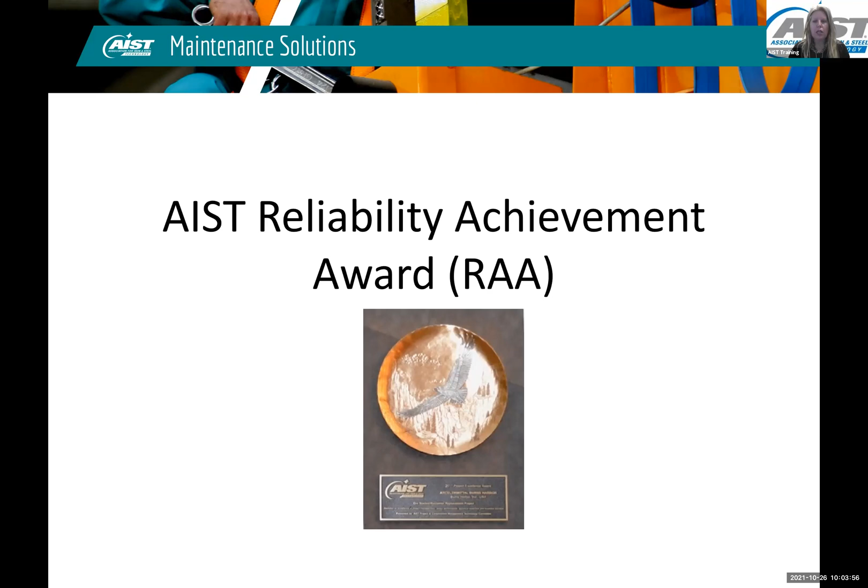Sorry, now my computer's frozen.

It is awarded to an iron and steel producing company that has made a reliability improvement within the organization. It recognizes both the organization and the individual involved in designing, proving, and implementing a policy or practice that increases the reliability of an organization.

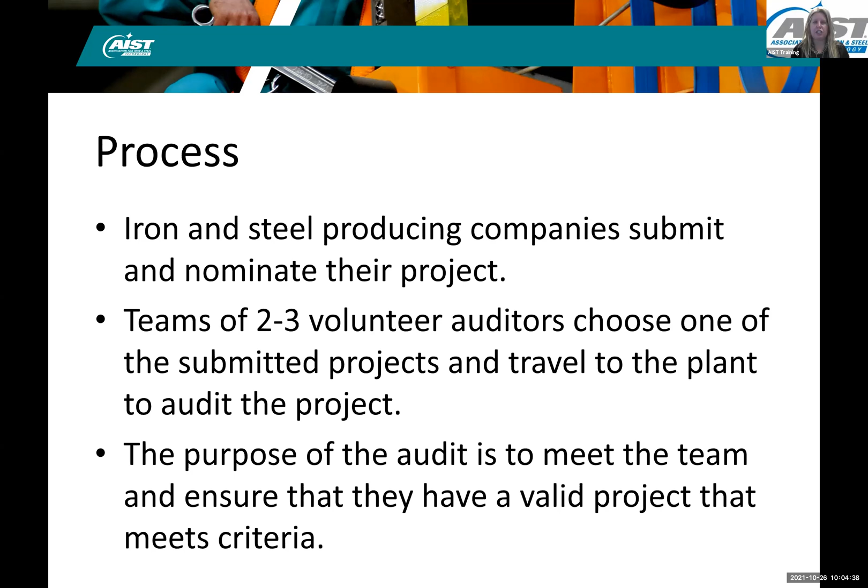We offer 3 levels: gold, silver, and bronze. People nominate and submit their projects, and then a team of 2 to 3 volunteer auditors choose a project. They go to the plant and audit the project, hearing the presentation from the submitter and actually looking at the project. Then the auditors come back and meet collectively, discussing the projects they audited, and using a matrix ranking system based on certain topics, we decide which project was awarded the gold, the silver, and the bronze.

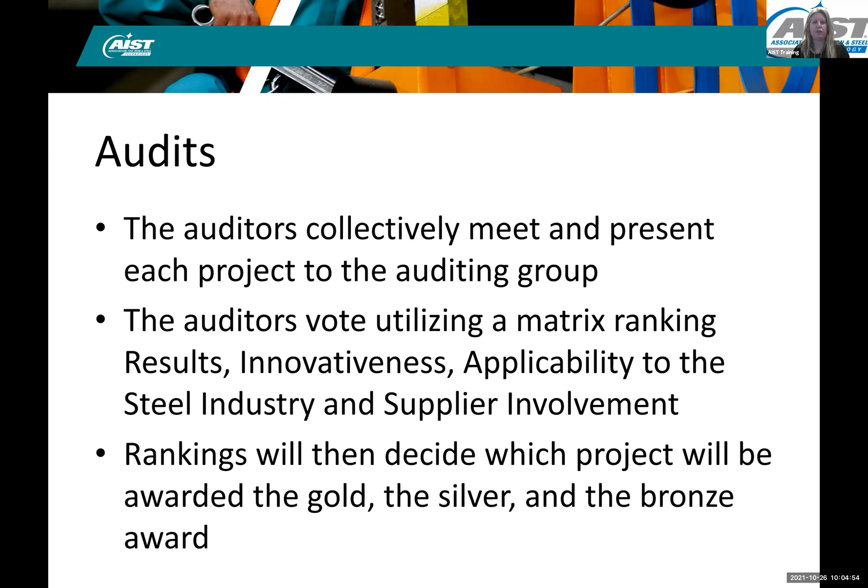So first up, we are going to introduce Jason Vicari. He is the lead maintenance engineer at Cleveland Cliffs, Indiana Harbor in East Chicago. He graduated from Purdue University in West Lafayette, Indiana, with a BS degree in mechanical engineering. He's a certified lubrication specialist through the Society of Tribologists and Lubrication Engineers, and is a registered professional engineer in the state of Indiana. Jason is also the winner of 3 previous AIST Reliability Achievement Awards.

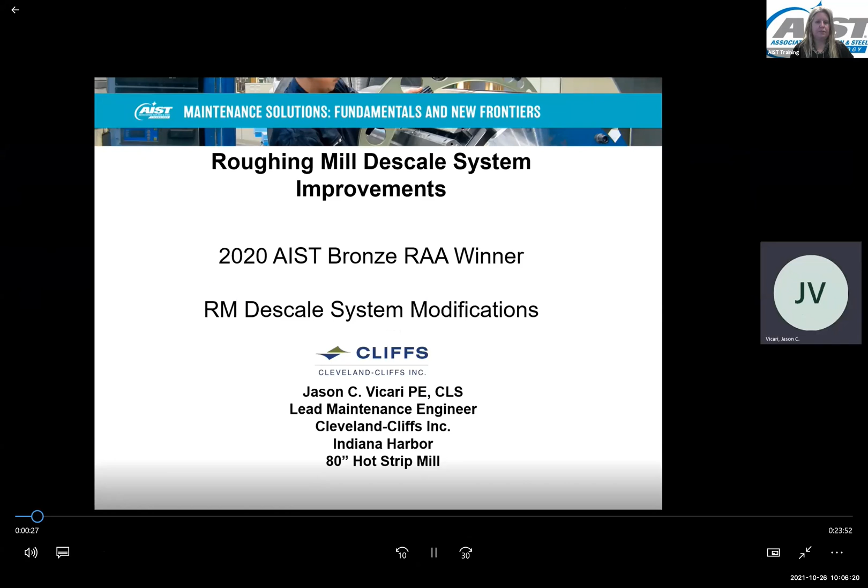Hello, my name is Jason Vicari. I'm lead maintenance engineer at Cleveland Cliffs, Indiana Harbor 80-inch hot strip mill. I'm here today to talk about the 2020 AIST Bronze Reliability Achievement Award winning project, describing our roughing mill descale system modifications.

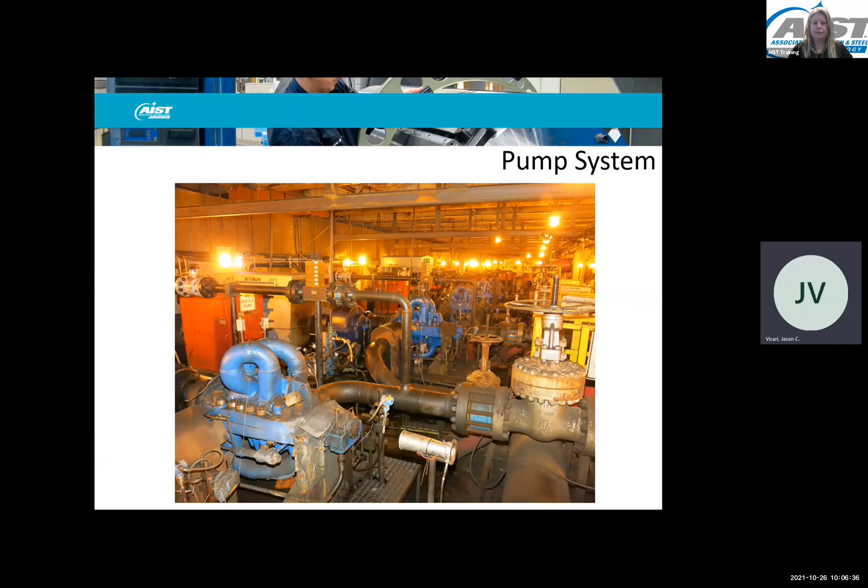We'll start with a picture of our pump room. As background, our roughing mill descale system was original equipment, started up in 1965. I have 5 pumps installed, 4 operated at any given time. The original system operated, depending on which documents you read, somewhere between 1500 and 1650 PSI, and had 13 descale stations. Many modifications have been made to the system over the last 56 years.

One of those was that the pump bypass was changed from an all-or-nothing system to each pump having a separate line back to the inlet of the pump and a shut-off valve installed. Our headers were increased from 4 to 6 inch diameter, but the feed pipes remained at 4 inches. At some point in the past, the nozzle flows were increased, and descale stations have been eliminated over time. We are now down to 6 stations. Each station is top and bottom header.

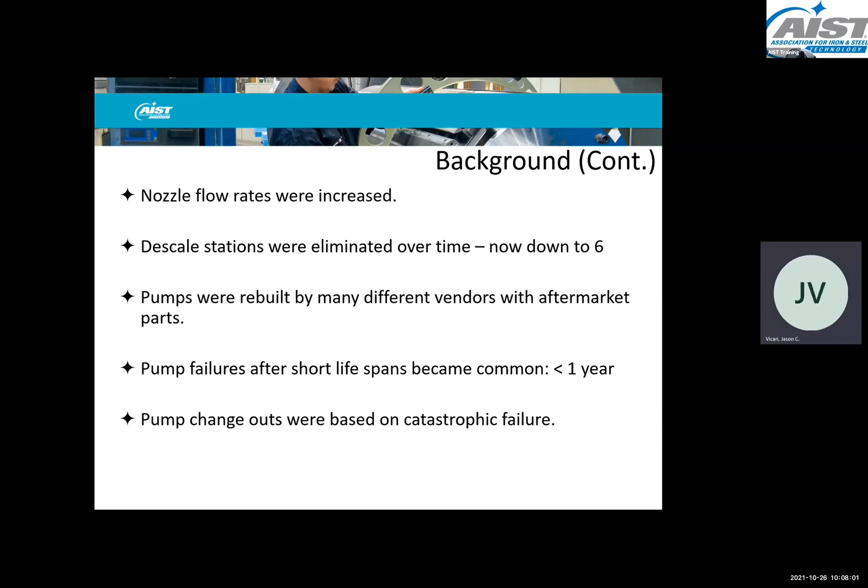Our pumps have been rebuilt by many different vendors with aftermarket parts over the years. When I first started looking into this system, pump failures occurred after short lifespans, and service time less than 1 year became common. Pump changeouts were based on catastrophic failure, not on any kind of preventive method. We had pipe washout in certain parts of the system. Our bypass valves would wash out. Our gearboxes, speed increasers, would experience wiped Babbitt bearings and broken gear teeth.

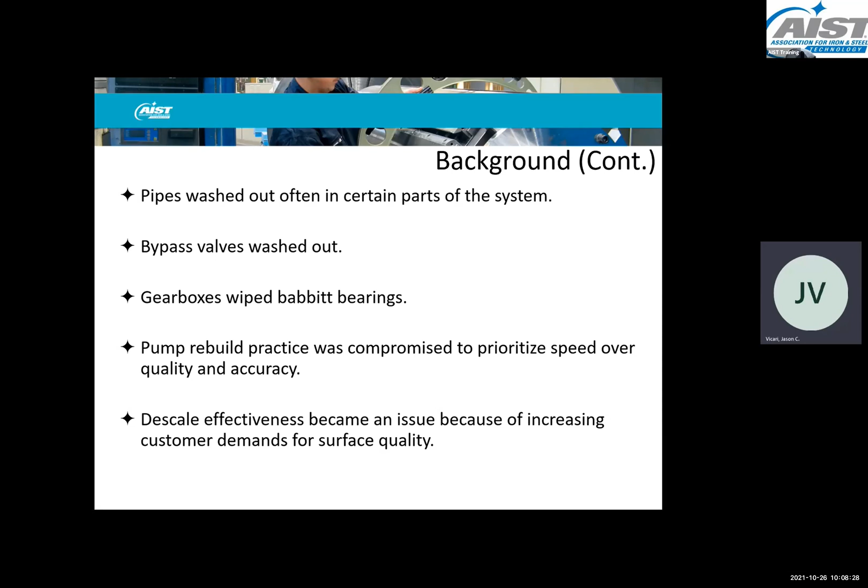Our pump rebuild practice was compromised to prioritize speed over quality and accuracy. And eventually our descale effectiveness became an issue because of increasing demands from our customers for better surface quality.

A major change that happened to this system was that we installed a second descale system that supplied the Pentrol scale breaker, which is a bank of 2 banks of headers right before the finishing mill. That brought us down to 6 stations for the roughing mill. The commissioning of the pinch roll scale breaker system in 2005 and the startup issues with that system led to a major project.

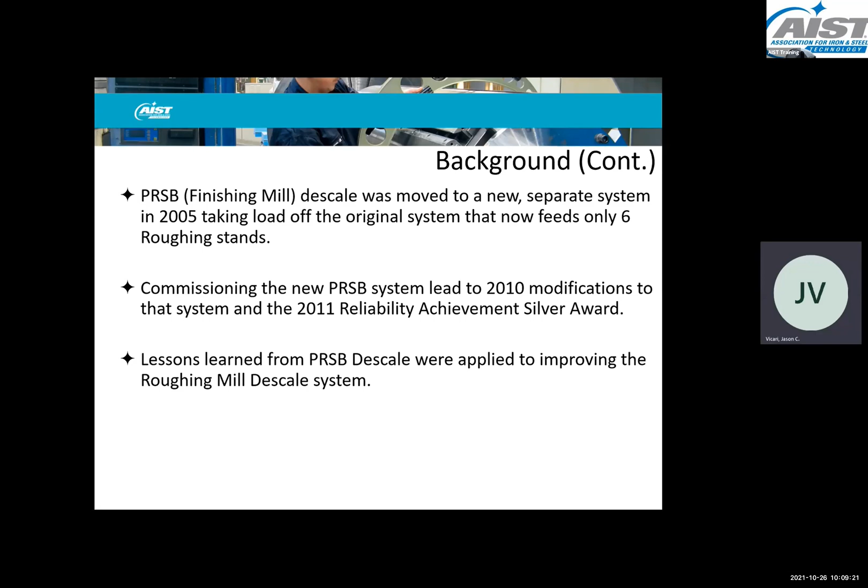That project, which I did in 2010, improved reliability of that system and earned the 2011 Reliability Achievement Silver Award. Lessons learned from the pinch roll scale breaker system were applied to improving the roughing mill descale system, which is the subject of this presentation.

So this project is really a long list of consistent and persistent work. This presentation is put together in chronological order to describe that work, which really started in 2008 and continues until today. It's important to note that the Reliability Achievement Award process from AIST recognizes that vendors and suppliers are very important partners in improving reliability and sustainability.

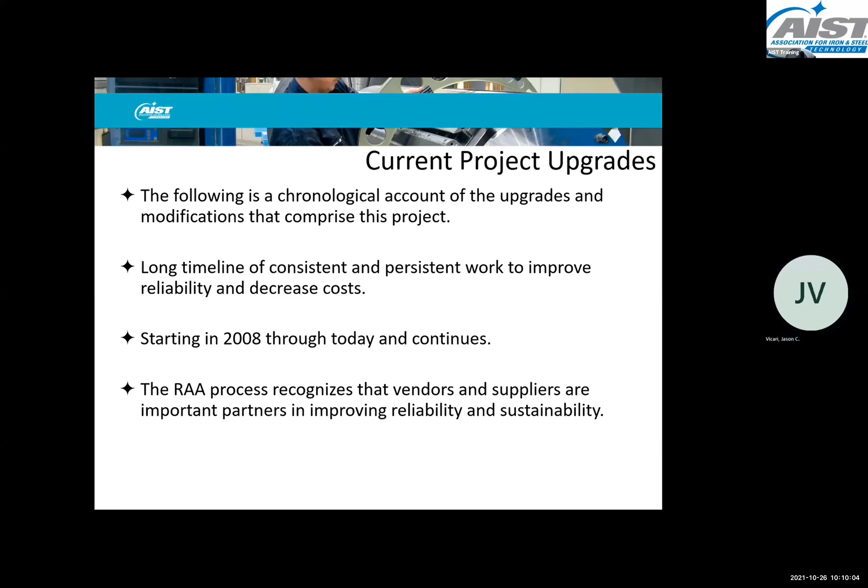So in 2008, we added instrumentation to discover that our incoming filter, which hadn't really operated for a long time, was partially plugged and restricting water at a large pressure drop to the inlet of the pumps. So we replaced it with a Ball & Kirk self-cleaning filter with 500 micron filtration. And our bypass line around the filter had been too small, so we increased it to the proper size to supply our pumps.

During the same period, we also inspected and recertified our 2,000-gallon air over water accumulator to provide some instantaneous flow and some shock absorption. BOC Water Hydraulics helped us with the automatic shutoff valve and instrumentation so we could monitor the level and pressure in our bottle. There's a picture of our self-cleaning filter with our now properly sized piping.

2009, we upgraded our descale nozzles from, by all accounts, ones that had either been in service and unchanged for 30 to potentially 50 years, and upgraded those nozzles to state of the art.

Choosing a new supplier for nozzles was pretty easy. Our plant manager had experience at a previous steel mill with Everloy brand descale nozzles. Those are produced in Japan. Just as a note, Lechler is a German company that makes descale nozzles and Spraying Systems makes nozzles that are made here in the United States. Both of those companies are very capable and have products that can perform similar descale work. In my particular case, I didn't get a chance to evaluate them because of the directive from the plant manager.

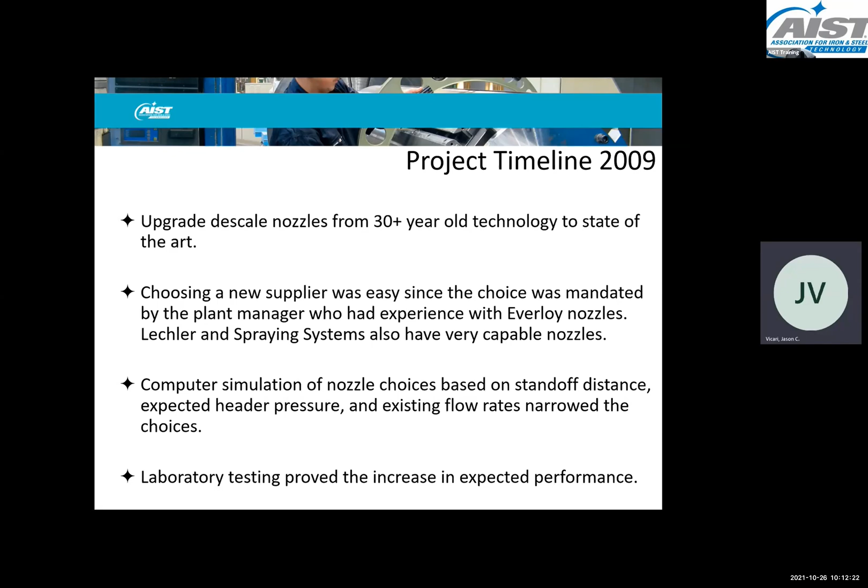But Everloy also provided laboratory testing and simulations based on our standoff distance, header pressure, and existing flow rates to narrow the field. And those simulations were backed up by the laboratory testing to prove that performance would be as expected.

So the nozzle selection in 2009 was based on the 7-inch standoff that we have at our horizontal scale breaker, which is our first roughing mill at 7 inches, and then the R1 through R5 stands, it's actually 9 7/8 inches. That's a typo, it's correct in the table. The impact improved at the larger standoff distance. It was about the same at the 7-inch closer standoff distance, but the quantity that drastically improved was the erosion, which is really a measure of how effective the descale is.

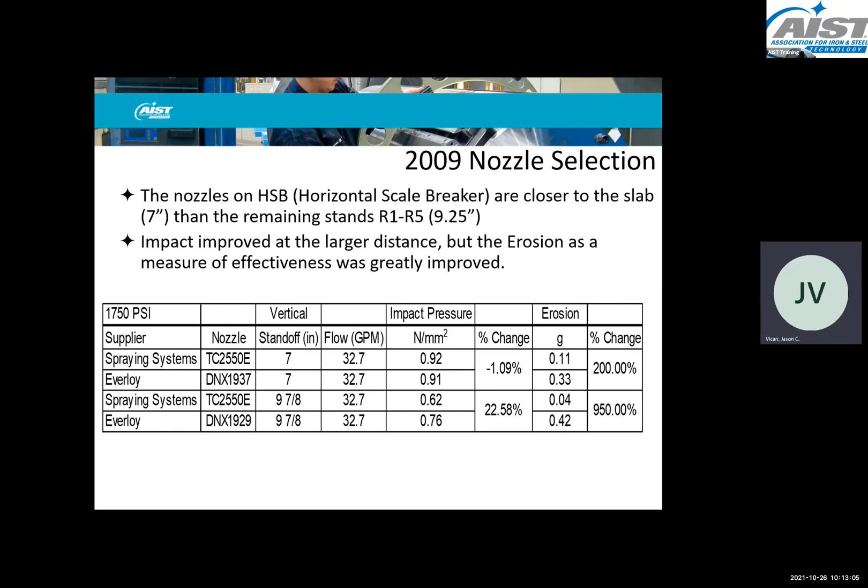The nozzles are tested by Everloy and the other nozzle manufacturers using a pressure transmitter that sweeps across the spray to give a profile, which is the top picture there, and the bottom picture is an indication of the maximum impact pressure experienced throughout the spray.

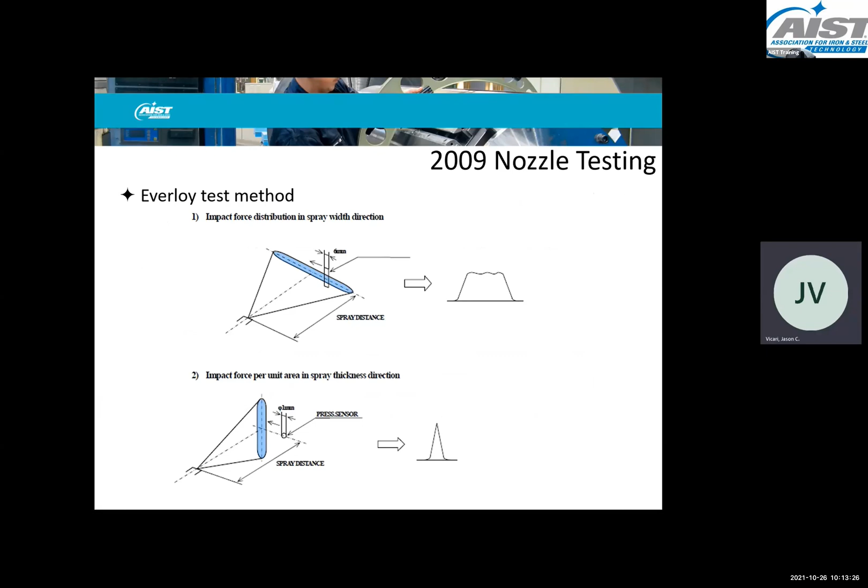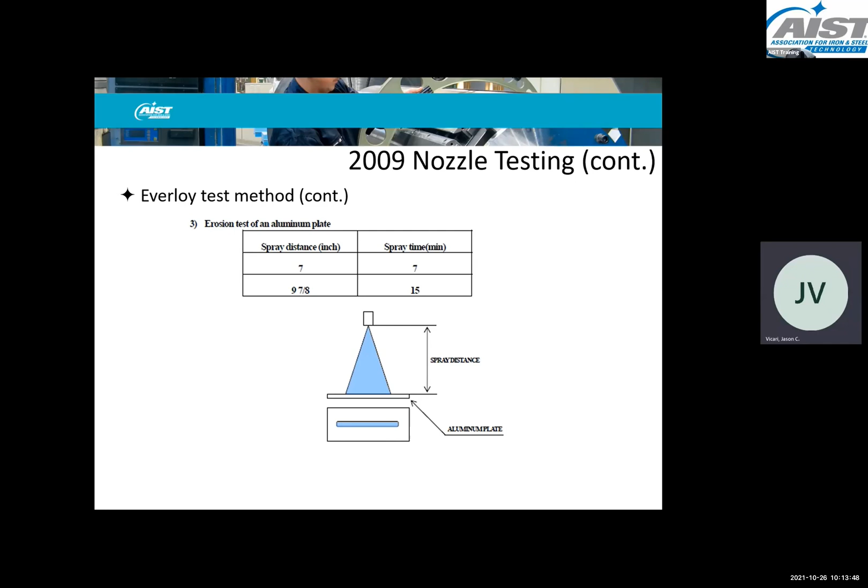And moving along then in 2010, we restored our system relief valve, installed a fixed orifice to control the amount of flow. BOC water hydraulics helped us with that unit.

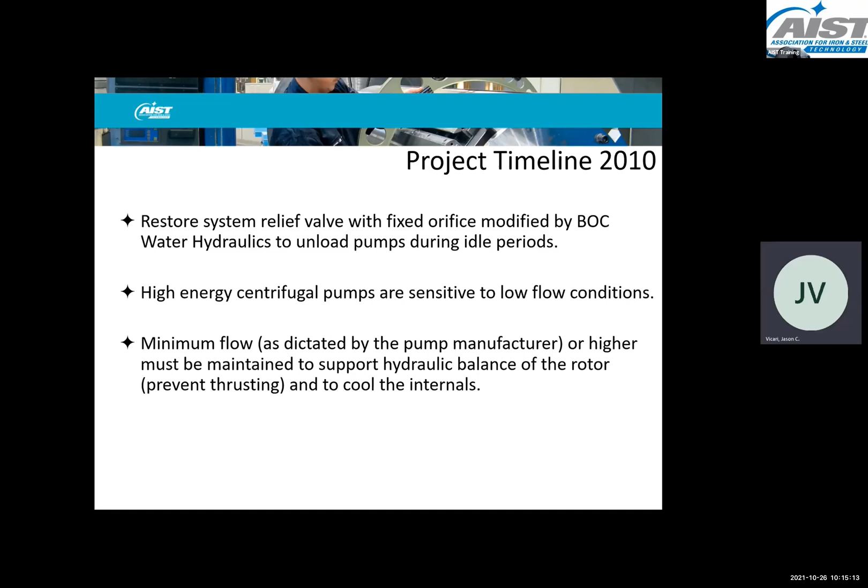As a side note, high energy centrifugal pumps, such as my 4-stage Worthington, are very sensitive to low flow conditions and to large changes in flow conditions. A minimum flow requirement is usually specified by the pump manufacturer. That minimum flow or higher must be maintained to support hydraulic balance of the rotor and to prevent thrusting, and to make sure that the internals of the pump stay cool.

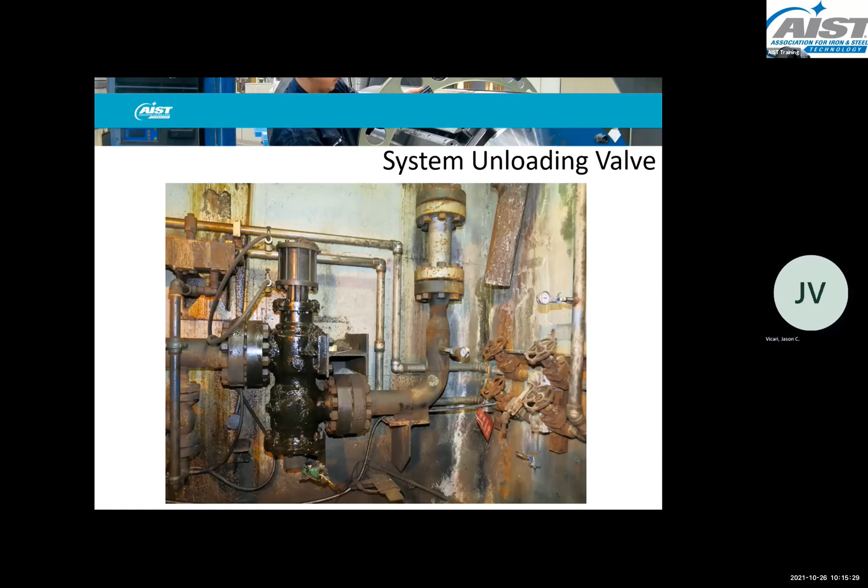Here's a picture of our unloading valve going through our fixed orifice, the dumbbell unit that's in the vertical piping there. And that dumps into the flume just to give the pumps some additional flow to keep them running smooth and cool during idle times on the mill.

In the 2011-2013 timeframe, we reconfigured the pump bypass to eliminate the shutoff valve. What we had found was that the weaker pumps that were being shut off, had their bypass shut off, were essentially deadheaded since they weren't able to flow through the bypass and they weren't able to overcome the discharge check valve. So this would lead to rotor thrusting and premature failure of pump gearbox system.

We restored the discharge piping of the pump to the proper 10-inch check valve and piping from the 6-inch that had been installed at the time due to previous failed equipment and budget reasons. The piping couldn't be restored to where it should have been at the time. We also installed a fixed orifice unit from BOC Water Hydraulics in the bypass line to regulate that bypass flow.

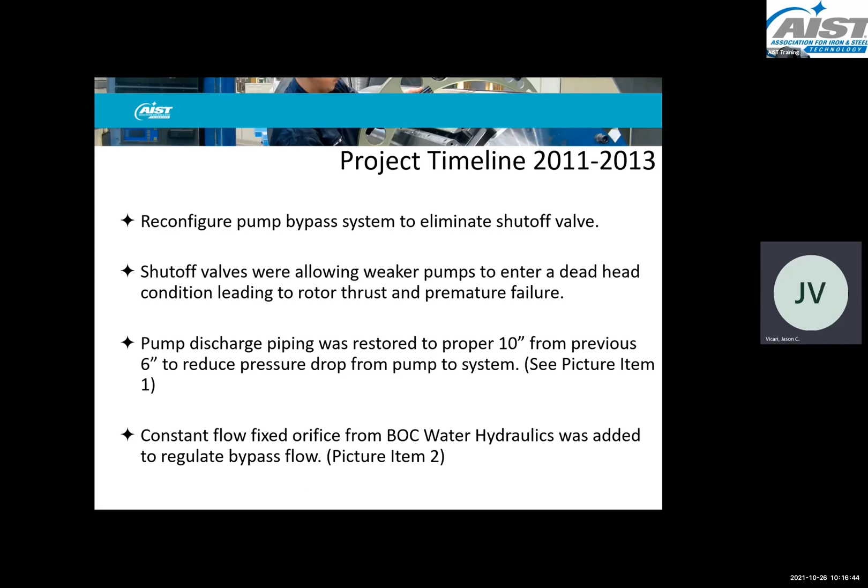So I have a picture here in one more slide. The flow through the bypass needs to be monitored to show the health of the pump and the condition of the fixed orifice plates. At the time, we didn't have the budget to install a flow meter, but one was specified, and a spool piece was installed in our piping so that later on when we had the funding, we could install flow meters. Those flow meters were installed in 2017.

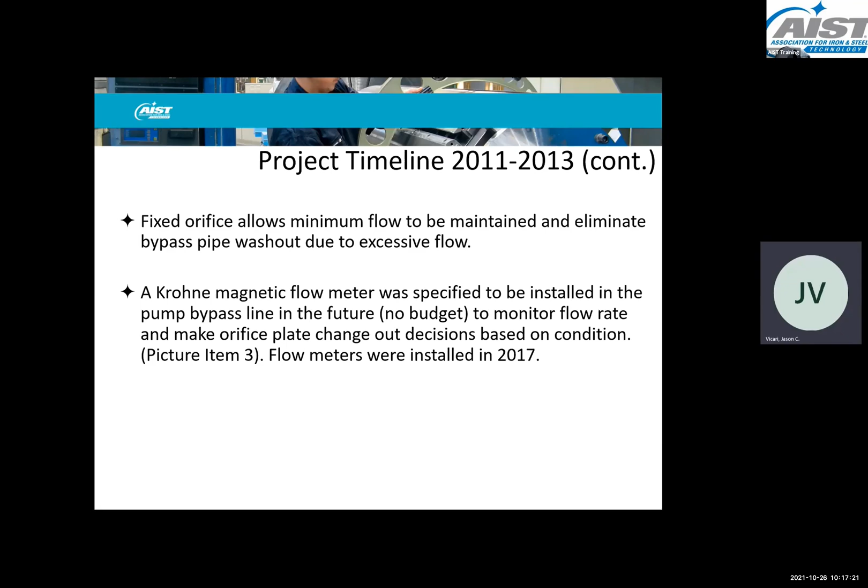So there's a picture of our pump setup with our discharge and bypass. Number one is the discharge line, which was increased from 6 to 10, with a new style check valve installed. Number two is the fixed orifice unit, which regulates the bypass flow. There's always bypass water flowing off the pump so that when system conditions change, the pump always has somewhere to send the water. Number three is the mag flow meter that helps monitor that process.

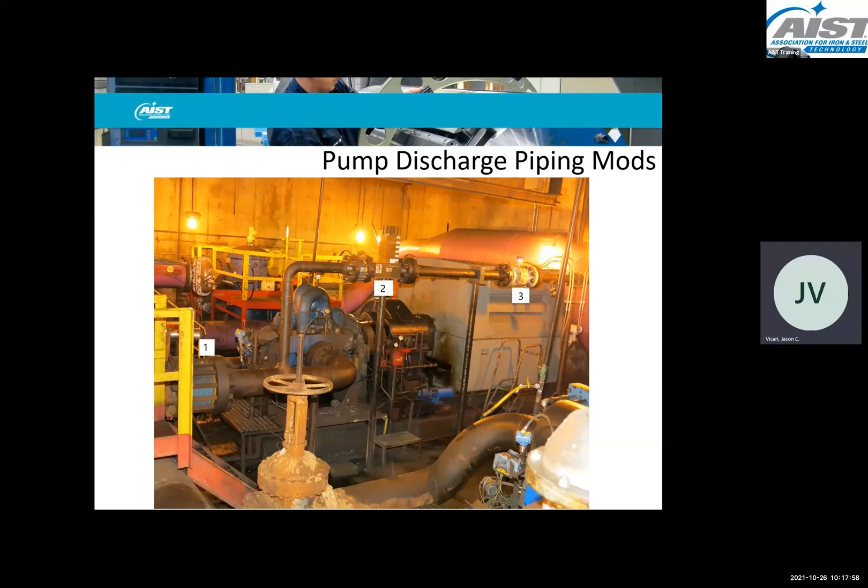In 2016, we improved the header prefill system. We always keep water flowing through our headers so they're always charged, so when you open the main valve, you don't have water hammer that could damage the nozzles or the header. The previous units had a large amount of turbulence and regular pipe washout. The BOC stacked orifice design eliminates that turbulence. Since we installed those units in 2016, we have not had any washout in that area. Based on prior experience, we've learned we need to change those plates out about every 30 months, which is pretty low maintenance.

Here's a picture of one of our descale valves in the center, and up at the top right you see the double flanged stacked plate orifice system. When the plates wear out, we just change the plates. The body is a forged stainless steel body, which has a very long lifespan.

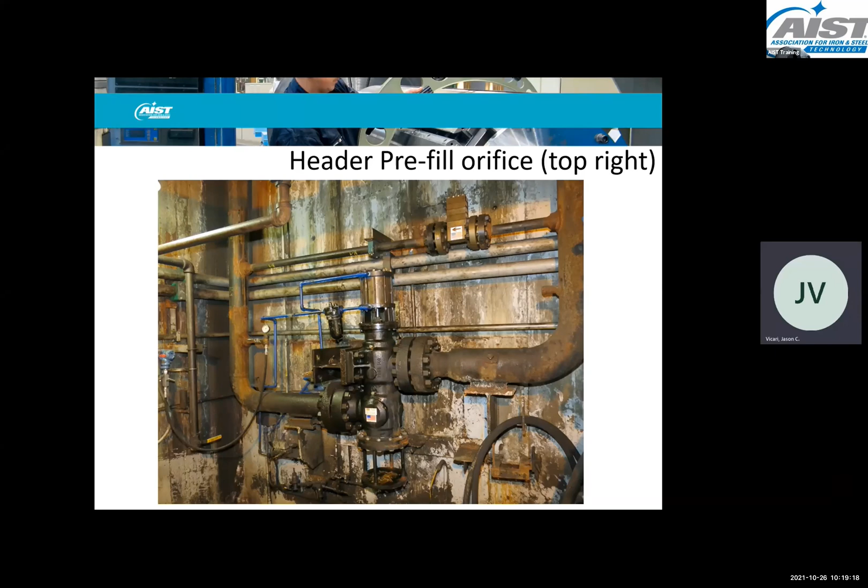In 2017, we saw that our pump life had been improved greatly with the system modifications made up to that date, but our performance still lagged our expectations. At this time, we had a pump that was lagging repeatedly after rebuild by 2 different vendors, 4 different times. So we took the pump for a full inspection and engineering analysis to HydroAire in Chicago.

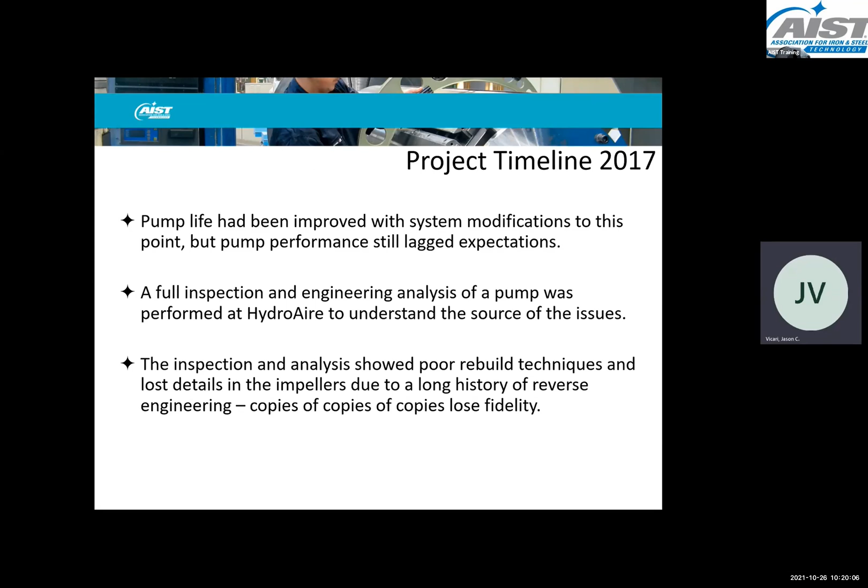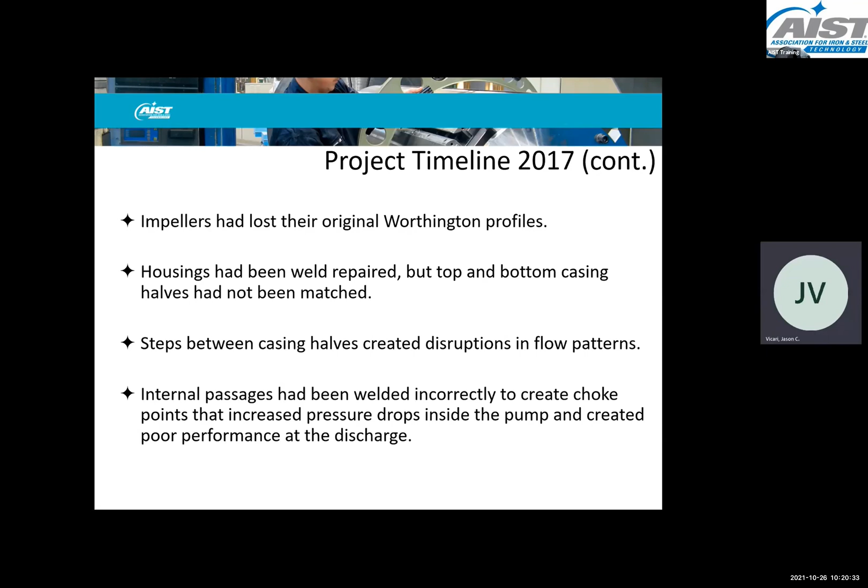Their inspection and analysis showed poor rebuild techniques and lost details, especially in the impellers, due to a long history of reverse engineering—copies of copies lose fidelity and performance. The impellers had lost their original profiles. The housings had been weld repaired, but the top and bottom casings were not matched to each other. This created steps between the two halves that resulted in disruptions in flow patterns and pressure drops. The internal passages had been welded incorrectly, creating choke points, which also caused poor performance.

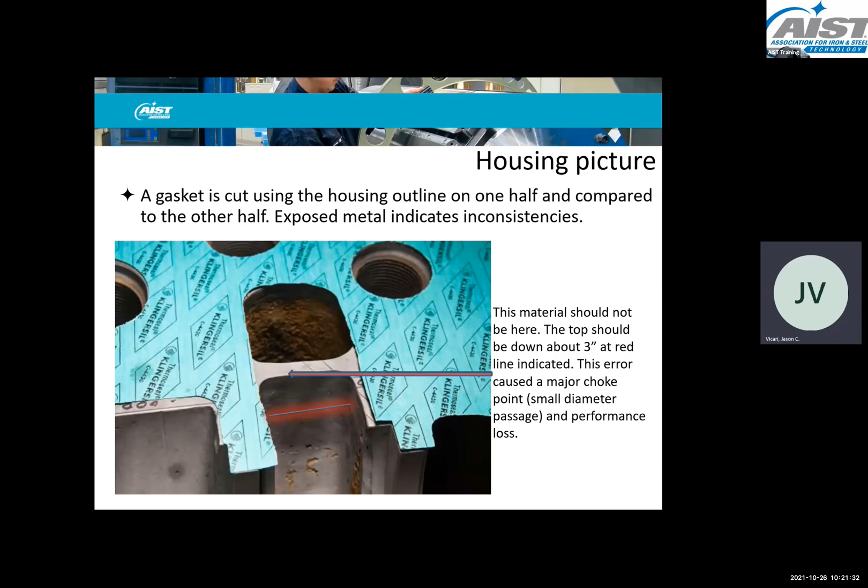The Hydroware engineers and repair specialists were able to correct the housing issues. They used computer models and computational fluid dynamics to redesign our impellers, manufacturing new impellers with proper profiles and oversized diameters. They assembled the pump with the oversized impellers, tested it, got results, disassembled, trimmed the impellers to match the performance we were looking for, reassembled the pump, and put it back on the test stand to prove the performance—and it was as we expected.

Each of our 6 pumps was rebuilt this way to return to original performance, and each pump was fine-tuned based on testing since each housing was worn differently. Our average pump life to this point has improved from some cases less than a year to as long as over 4 years now. Each pump disassembly includes an analysis of the failures, and we discuss improvement ideas—we practice continuous improvement. The goal is 20,000 hours of operation and 5 years of service, and we're getting there one step at a time.

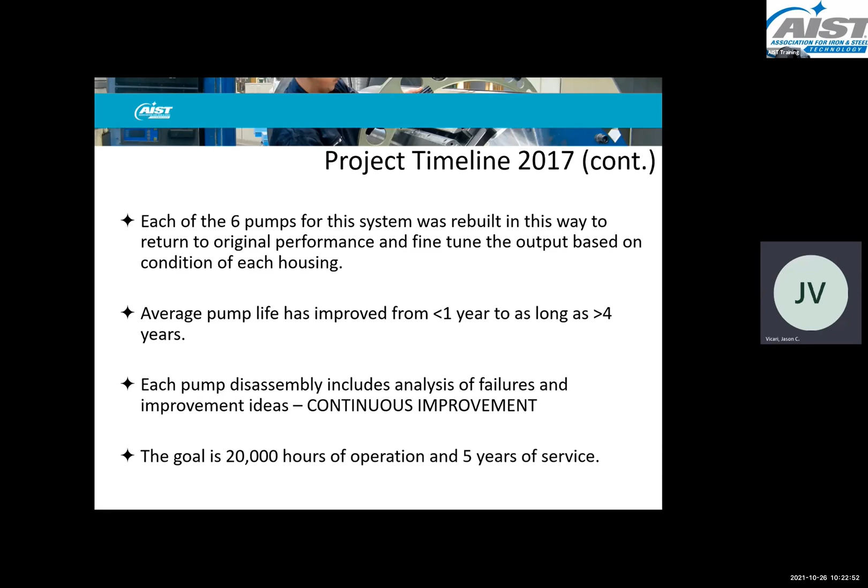In 2017, once our pump restoration was completed, it was obvious there were additional opportunities to improve efficiency. Everloy had introduced a new generation of nozzles in 2011.

Because of other activities I'm involved with in the mill, I didn't have time or really need to evaluate those, but now was a good time to look at that technology.

We found that the new nozzles could increase impact and erosion at the same operating pressure and flow. So with the increased performance of the rebuilt pumps, it was possible to decrease nozzle flow to the point where we could shut off the fourth pump and just run 3.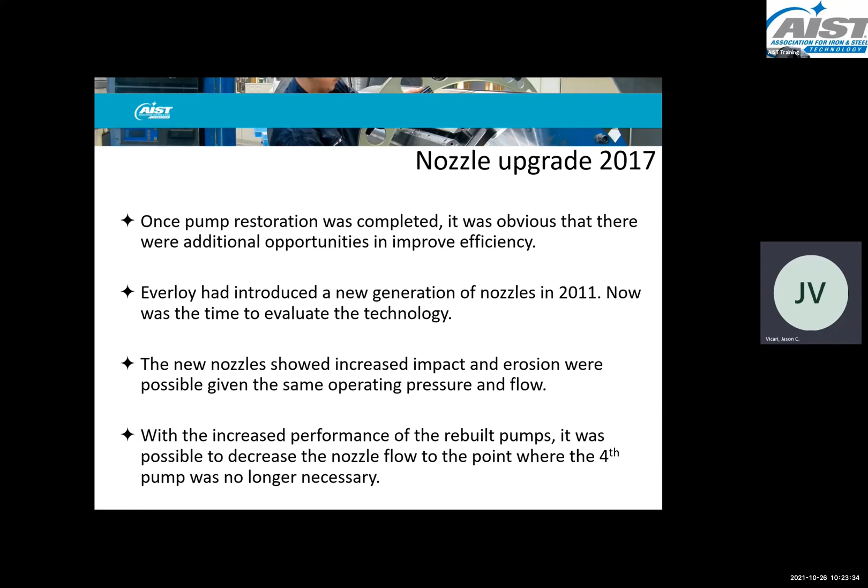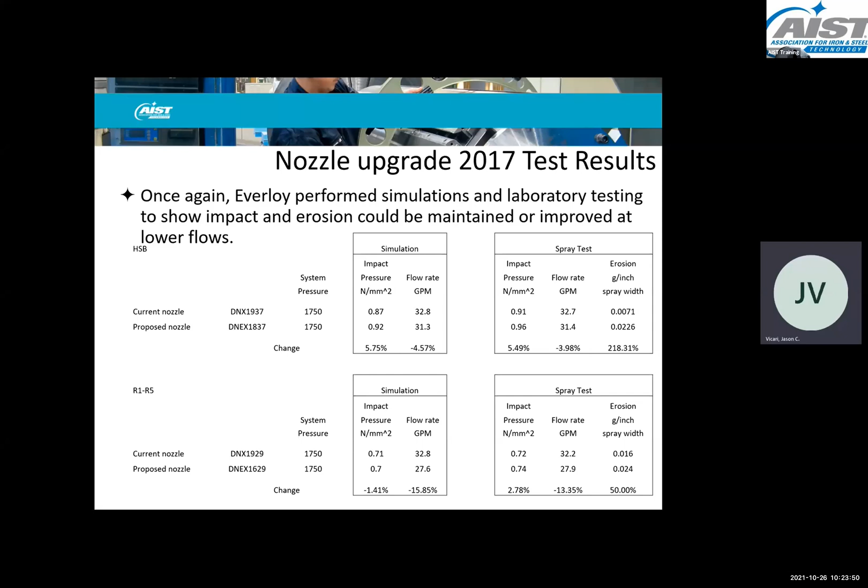This table is a little busy, kind of small, but we went through the same simulations and laboratory testing to show impact and erosion could at least be maintained, and in some cases improved, at lower flow rates.

The result of all that was that we decreased the flow rate at HSB, our first descale station, by 4.5%. We kept that flow a little higher because it's our primary descaler and we wanted the flow to sweep away the heavier scale coming out of the furnace. Flow rate was decreased at R1 to R5 by almost 15%.

Another benefit was the decreased flow rates. Remember, the flow rates had been increased in the past, but now with decreased flow rates, we had an improvement in the pressure drop from our main header to our nozzles by roughly 33%. So we decreased our pressure drop by 33%, which increases the energy imparted at the nozzle to the surface of the slab.

Also, our header pressure increased due to the reduction in flow. Our operating pressure increased from about 1750 PSI in 2009 to now routinely over 1850 PSI, which also increases the effectiveness of the nozzles again.

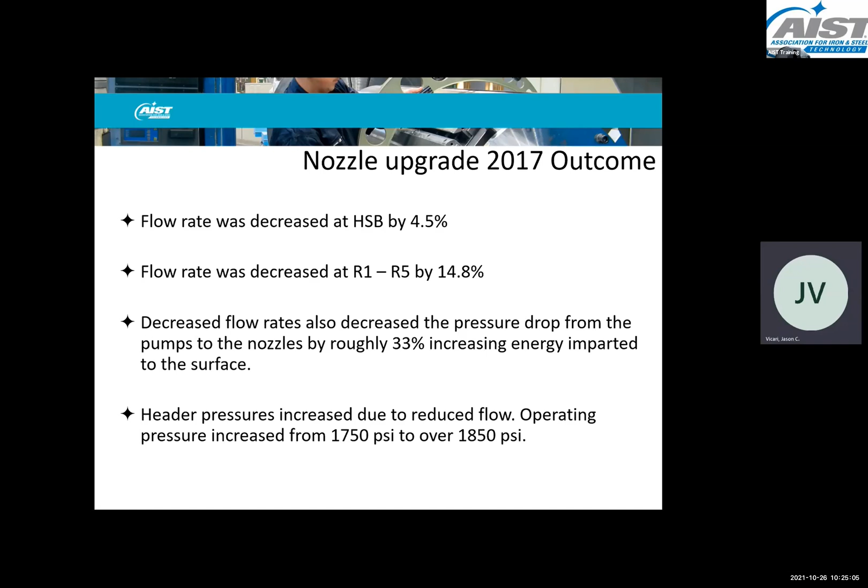So I'd like to go through a little bit of nozzle theory, just to prove that pumps are important to a system, but they're not the only part of the system.

I'm sure many of you have used a pressure washer, and you know the closer you get to the surface you're cleaning, the more effective the cleaning is. Well, this is no different, just on a much larger scale.

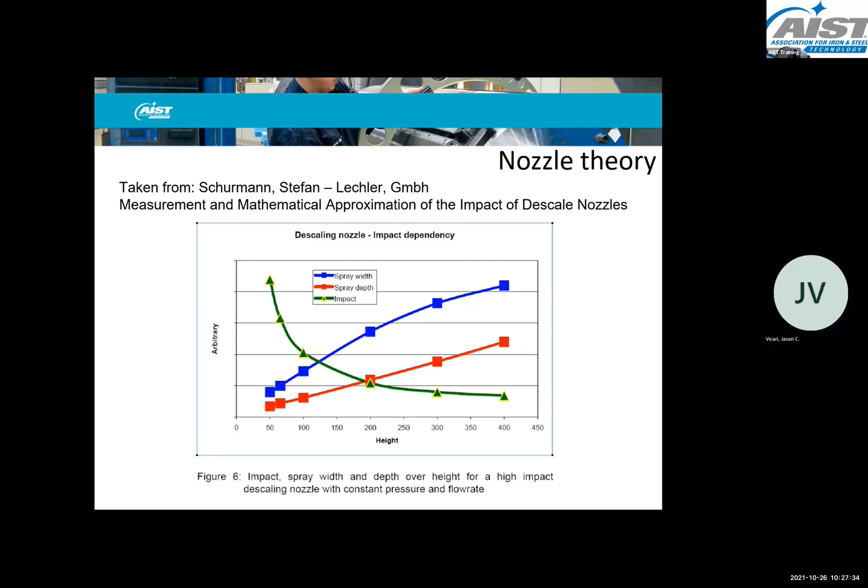So the benefits: by eliminating a pump and running 3 pumps instead of 4, our energy consumption reduced by 1,800 horsepower, which equates to roughly 9,800 megawatt hours per year, and roughly $680,000 per year in electricity.

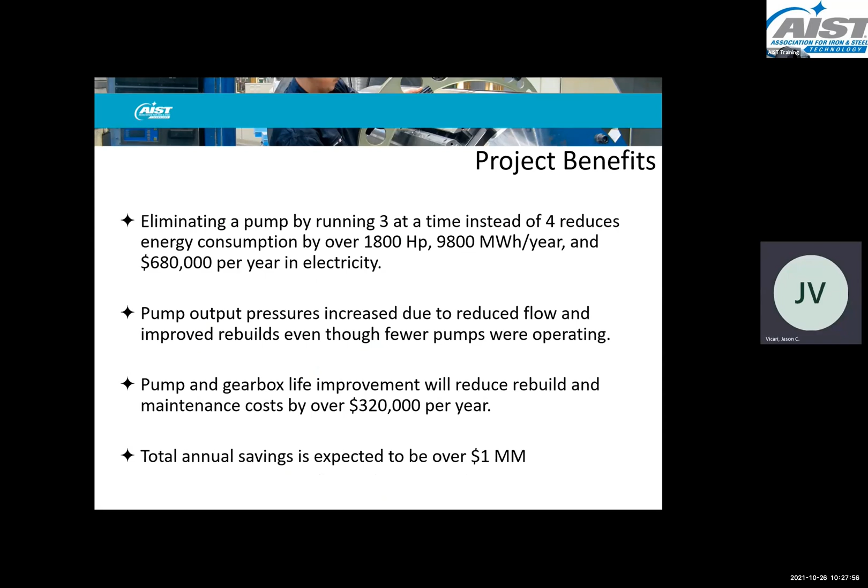Our pump output pressure increased due to reduced flow and our improved rebuilds. Even though we're operating fewer pumps, we have better performance. Our pump and gearbox life improvement will reduce rebuild and maintenance costs by over $320,000 per year. We haven't had any gearbox issues since we started this process 4 or 5 years ago.

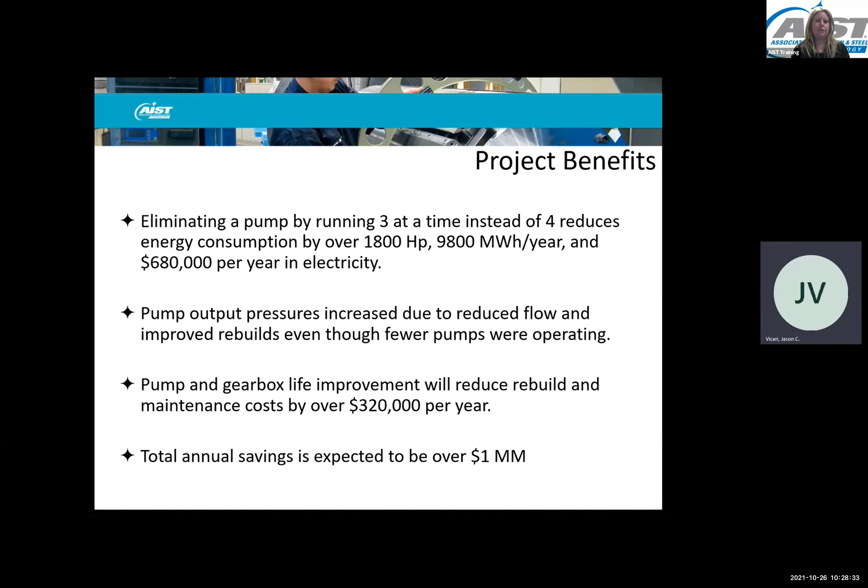Those same gearboxes are still in service. Plus, running fewer pumps leaves us now 2 online spares instead of 1, which spreads out our rebuild costs. Our total annual savings are expected to be over $1 million a year.

Major takeaways I'd like to leave you with today is that the pump is part of the overall system, but the system dictates how well the pump will run or if it will fail. I like to say the descale magic happens at the nozzles. The nozzles set the flow rates, which really dictates where your pump is going to operate. So the descale nozzles have to do the job of cleaning the strip, and you have to choose nozzles based on where your pumps want to operate most efficiently.

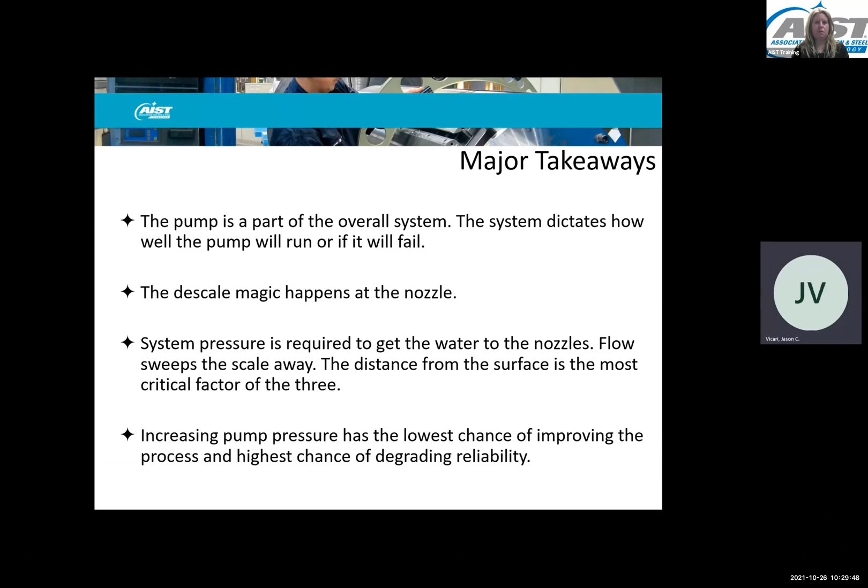System pressure is important to get the water to the nozzle, but the flow sweeps the scale away, and the distance from the surface is really the most critical of the 3 factors. Increasing pump pressure has the lowest chance of improving the process and highest chance of degrading reliability. Many of the issues we found in our primary scale breaker turned out to be pressure fatigue failures. The pressure was too high for the piping network as it was installed and led to rapid fatigue and failure. So higher pressure is not always a good thing. Increasing the effectiveness is really something that should be investigated.

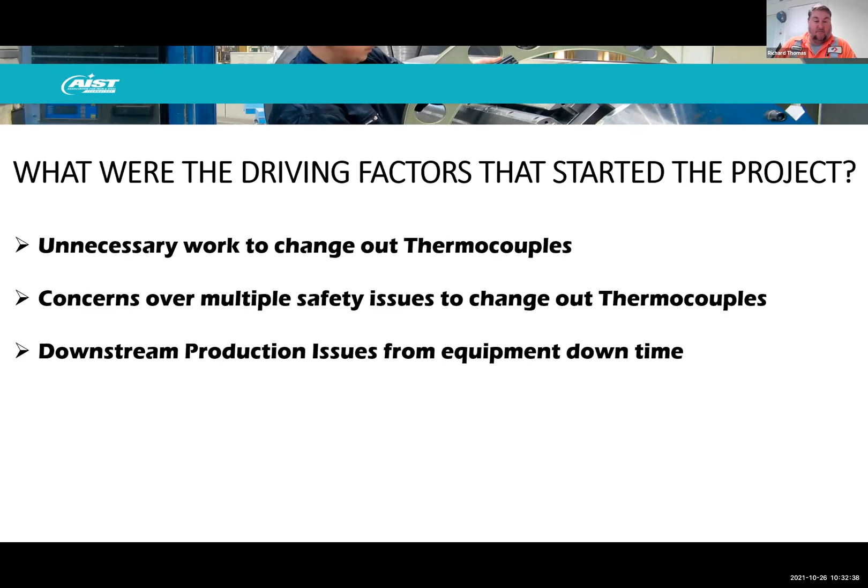Plus then we had ladle walls down, so we would impact production issues with the downed equipment. We were taking a long time to change out a thermocouple because we were constantly running in and out with the ladles on adjacent walls, moving in and out with the process. So I figured there had to be a better way to do it.

In 2017, I went to an automation fair in Atlanta, saw these optical pyrometers sitting on a table, asked them if it would do what I wanted, and of course they said it will, like any good salesman would do. Brought it back to my boss, who told me, yeah, if I think I can make it work, then go for it. So that's how it all started.

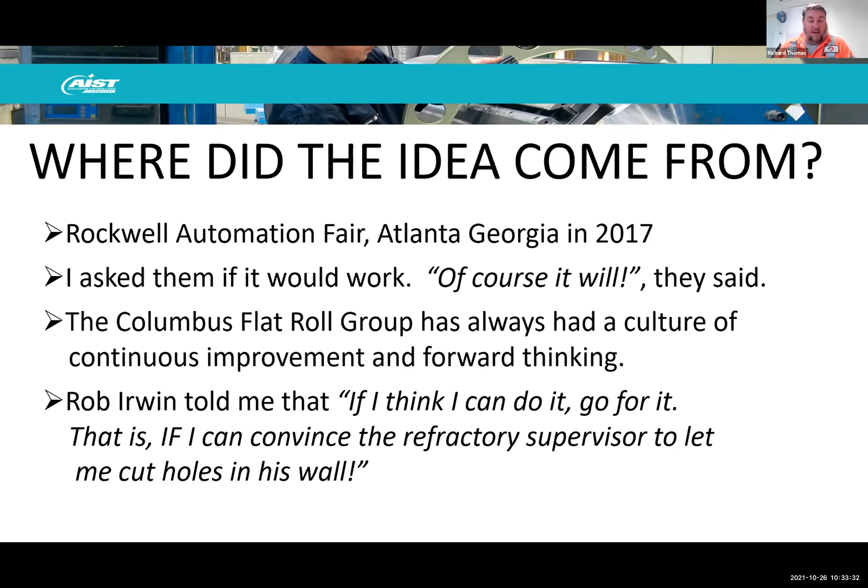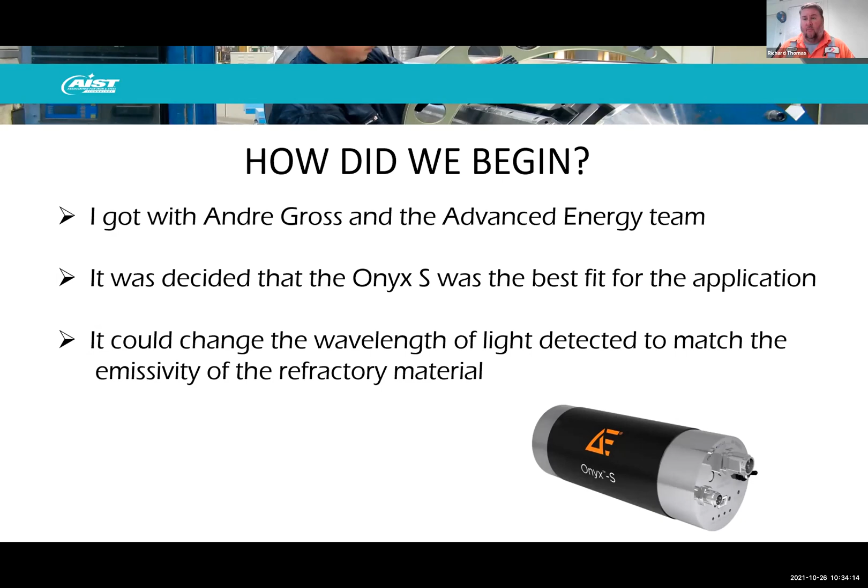So I got with Andre Gross and the Advanced Energy team, and we picked out the Onyx S pyrometer. The reason we went with this particular pyrometer after looking at several different types is that we could actually change the setup in the pyrometer and adapt the settings to the exact emissivity of the refractory material. The emissivity is the ability of any object to give off light when it's heated. So by being able to tune that, we were able to get a very accurate reading.

One of the major additions to the project was designing the sight tube for the pyrometer to look through, because the pyrometer is actually looking at the glow coming off the brick, so it has to be able to see through the wall. The hardest thing I had in the whole project was convincing the refractory supervisor to let me cut a 3-inch hole in his ladle wall.

So we made the tubes out of a solid stainless round stock, had them turned down in a single piece, 3-inch diameter with a 1.5-inch ID and a 5-inch flange on the outside. The tube was then welded into the ladle wall, and the pyrometer was connected via a bolt pattern, a 4-bolt pattern that you see right here.

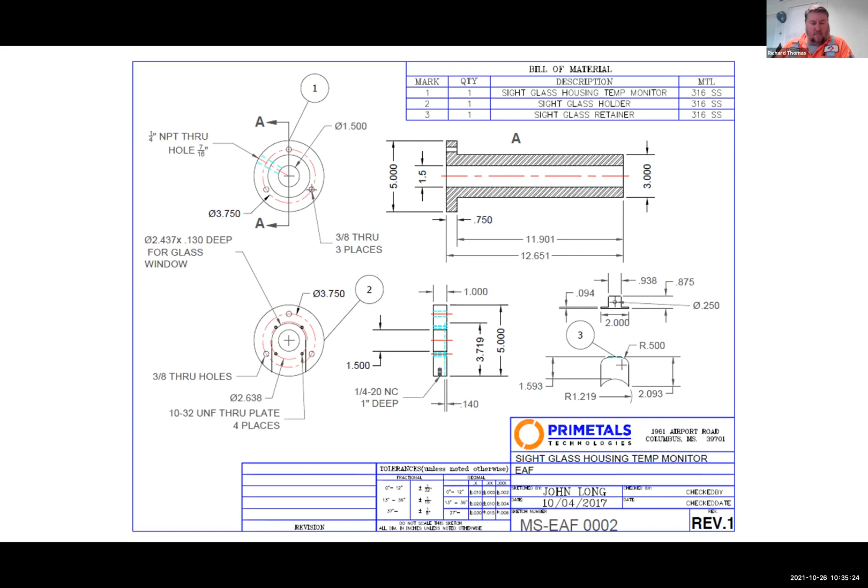We machined it out of 316 round stock with a 3/4-inch sidewall, so it didn't warp in the 1800-degree continuous heat. We also designed it so the end of the tube did not stick out of the refractory. One of the things that took the thermocouples out all the time is they had to stick out into the ladle area, so when a crane would pick up a ladle, it would often hit the thermocouples and bend them. By keeping the sight tube inside the refractory, we got rid of that problem.

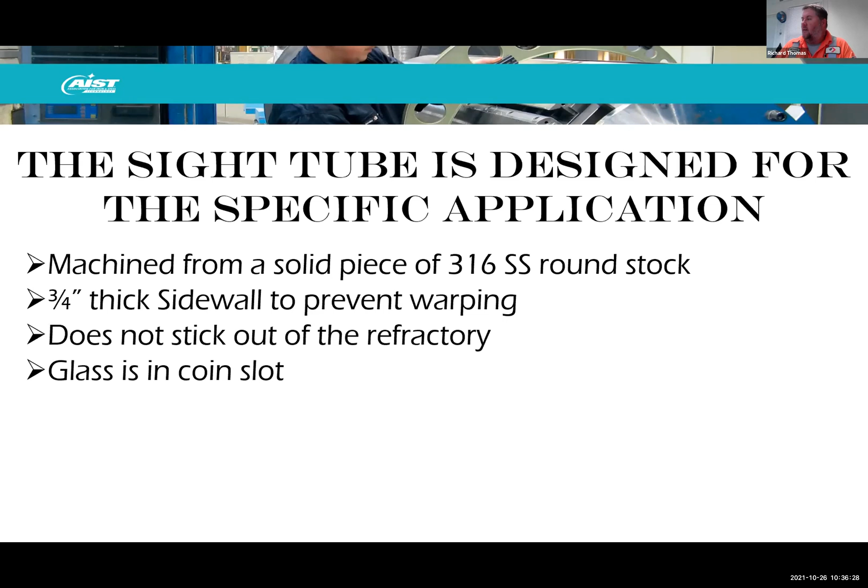The first time we put the pyrometers in, we were just observing. We had the thermocouple still controlling as it always had, and we were monitoring the pyrometer, which was set pointing at the bottom of the ladle. I was reading 1800 degrees on the thermocouple, our standard set point. The pyrometer was reading 2100 degrees, which we assumed was just because the bottom of the ladle was always a little hotter, wasn't a problem. We watched that for several days and it stayed consistent.

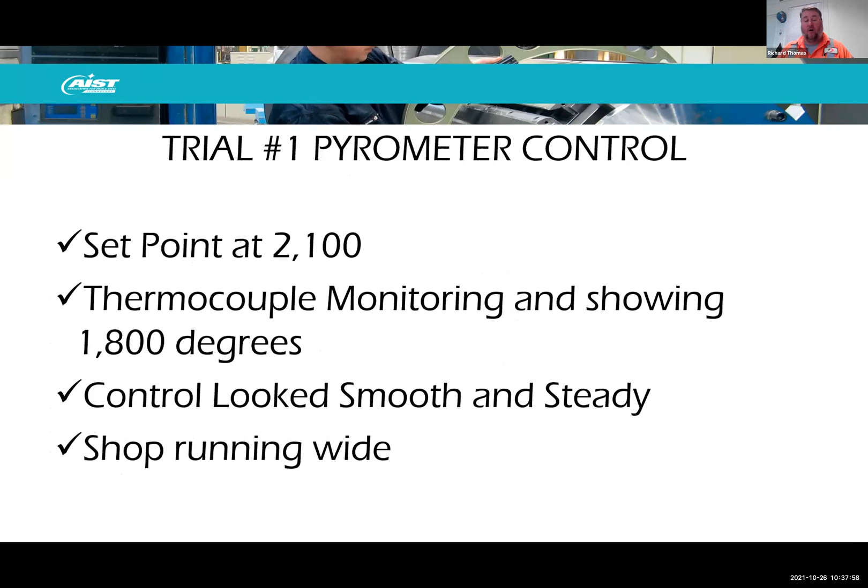Once we got satisfied that the pyrometer was working properly, we decided to attempt control with it. Since I was always seeing consistently 2100 degrees at the bottom, that's where we put our new set point on the burner controller. The thermocouple was still in, and now we were monitoring it, showing 1800 degrees like it always did. Everything looked good, looked like we had a good application going. The shop was running wide at the time, meaning we were cycling ladles through the ladle wall every half hour or so, or less.

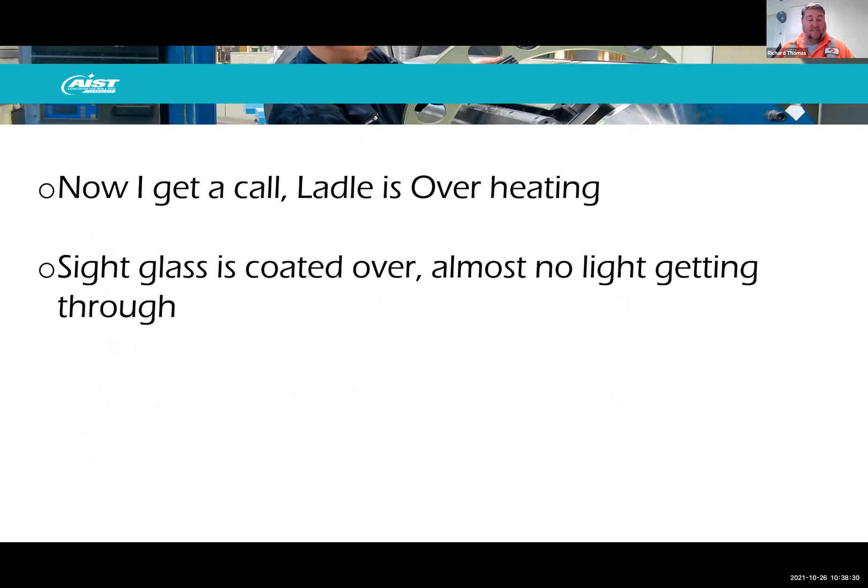Then one morning I got a call saying the ladle was overheating. I went down there, took a look, and the sight glass had coated over with slag, with almost no light getting through. The pyrometer sees the light, and if it can't see the light, it's not going to get a good reading. So the burner was maxed out all the way open because it was trying to reach that set point, so we were overheating the ladles. We changed out the glass and everything went back to normal. It was all good.

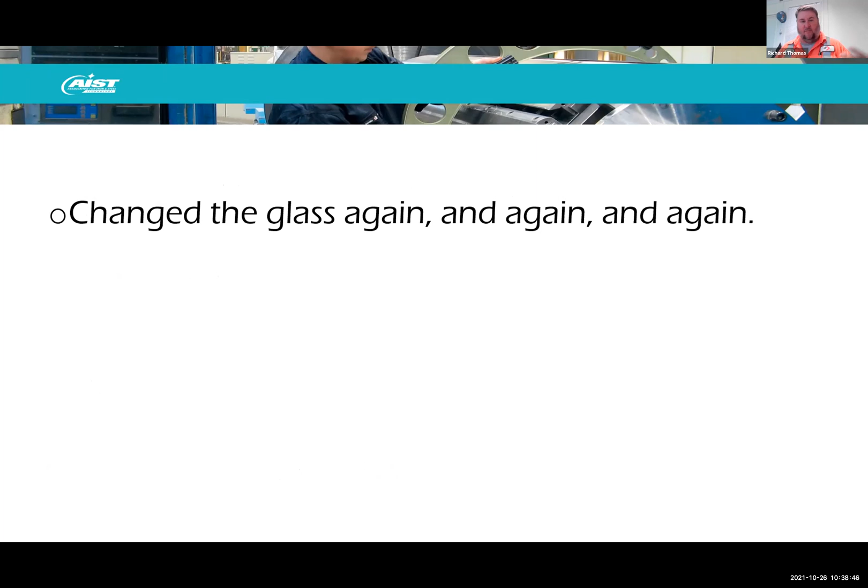The problem was, this kept happening. We changed the glass over and over and over again. Now, instead of being down there changing thermocouples, we were down there every day changing out the sight glass. That was the problem we had to solve.

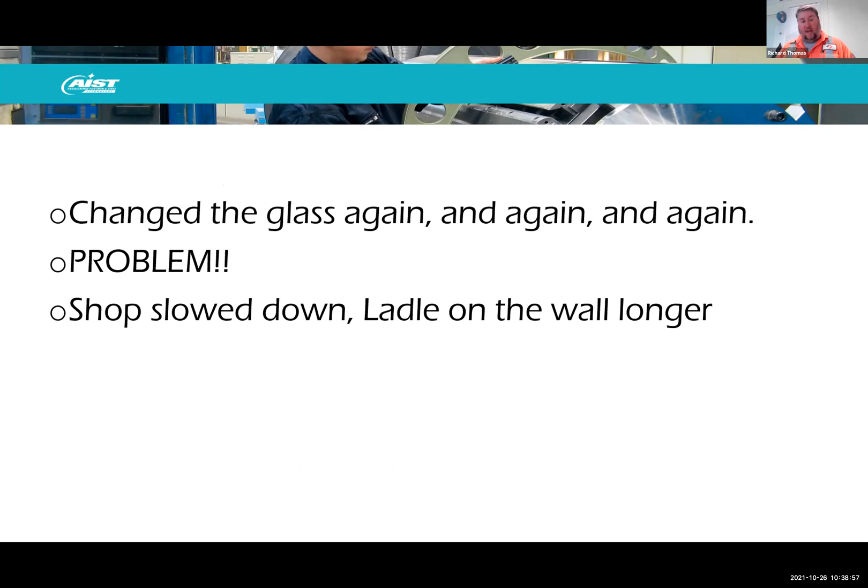Once the shop slowed down a little bit, we started running a narrow product, and the ladles were sitting on the wall longer. All of a sudden, that 2100 degrees was now reaching the thermocouple, soaking into the entire ladle. We were overheating the ladles, actually melting the slag out of them at that point. So we had a problem. We called that trial number 1, and it was a complete failure at this point. We couldn't get stable control.

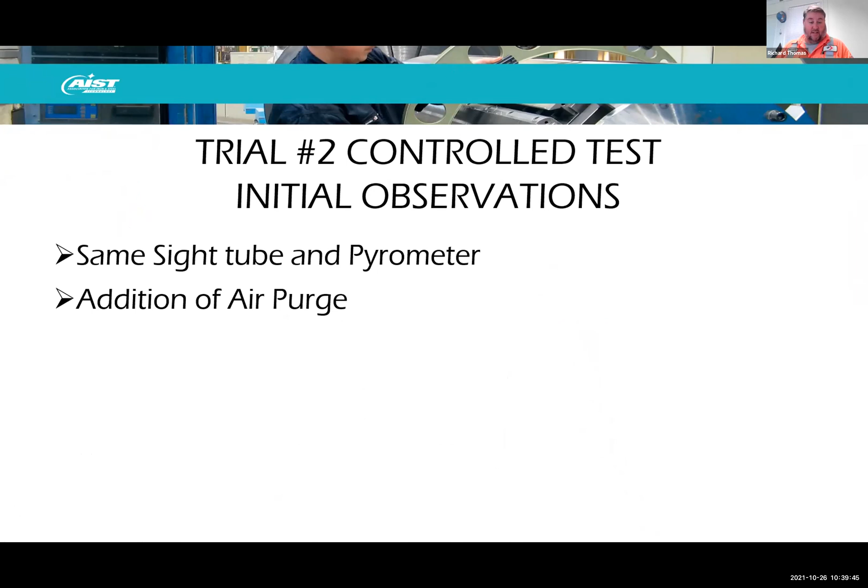We stepped back, thought about it a little bit, and decided to try it again. For trial number 2, we took a few different measures. We used the same sight tube and same pyrometer, but added an air purge to keep the sight glass clean, which did absolute wonders. We also changed the target location, deciding to get an average temperature by hitting either a 9 o'clock position or a 3 o'clock position in the ladle, which would probably give us our best average temperature.

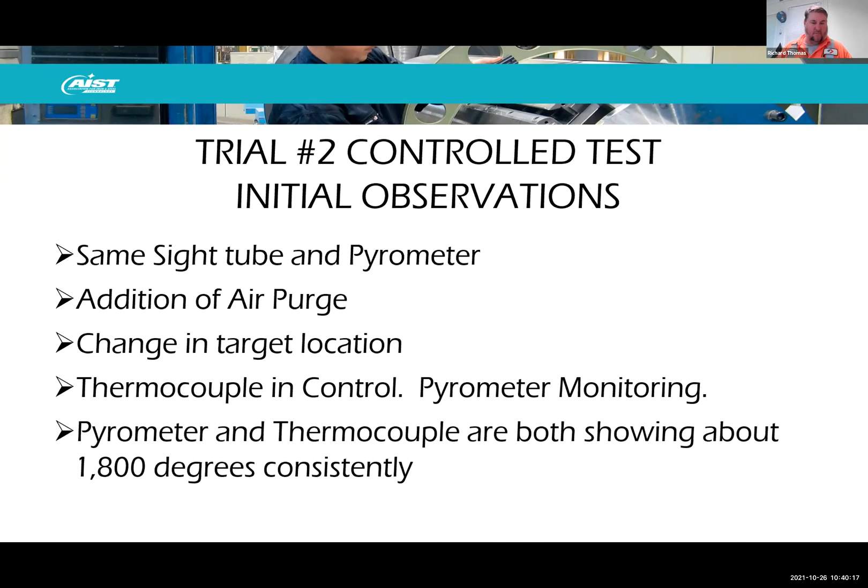The thermocouple was back in control again, and the pyrometers were back monitoring. We started another trial, this time with the pyrometer pointing at the 9 o'clock position in the ladle, and it was showing 1800 degrees, just like the thermocouple was.

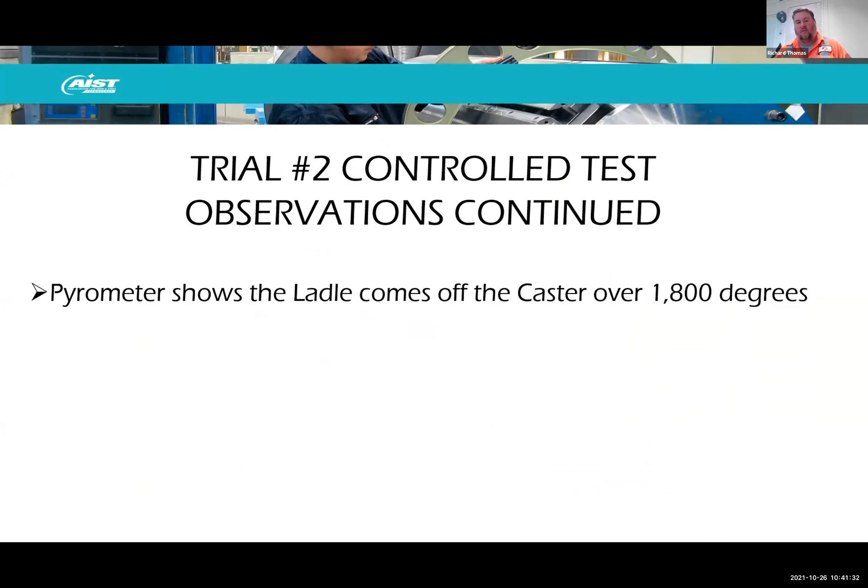So we started observing our controlled test. The pyrometer was showing the ladle actually coming off the caster already over 1800 degrees. The thermocouple, while it was still in control, was increasing the burner to full open to bring the temperature on up

because it couldn't see the 1800 degrees since it's such a lagging indicator. The pyrometer was showing the ladle brick overheating, at some point getting up to 2500 degrees before the thermocouple would finally reach that 1800 degree set point and back the burner off and cool everything off.

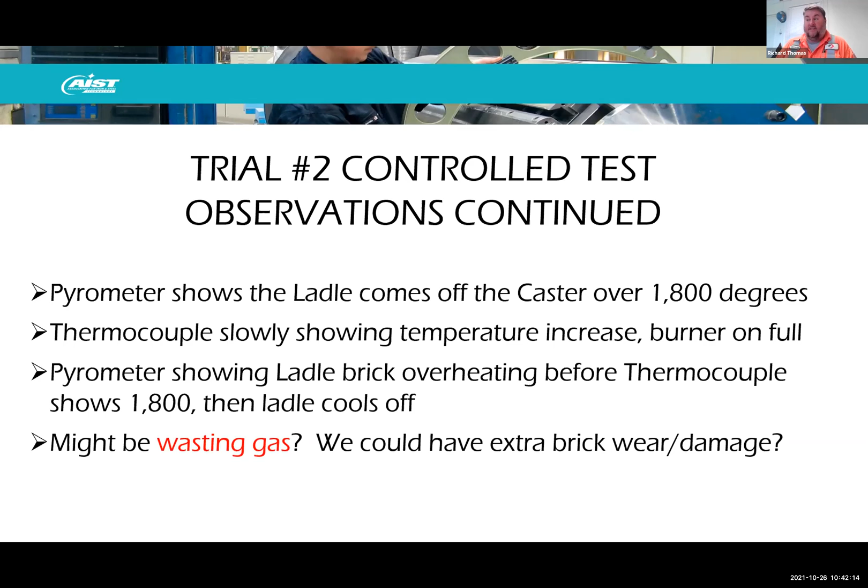So at this point, got to thinking about it, we could be wasting gas. And we're probably having extra brick wear and damage because of all the thermal cycling and the extra heat we're putting into it. We're also seeing a whole lot of extra movement on the actuators because with the thermocouple, it's constantly cycling, trying to find that temperature.

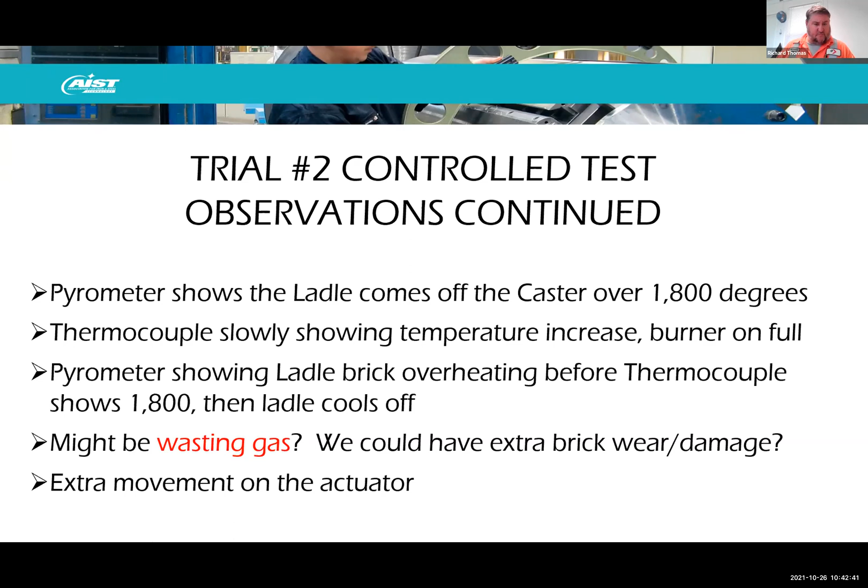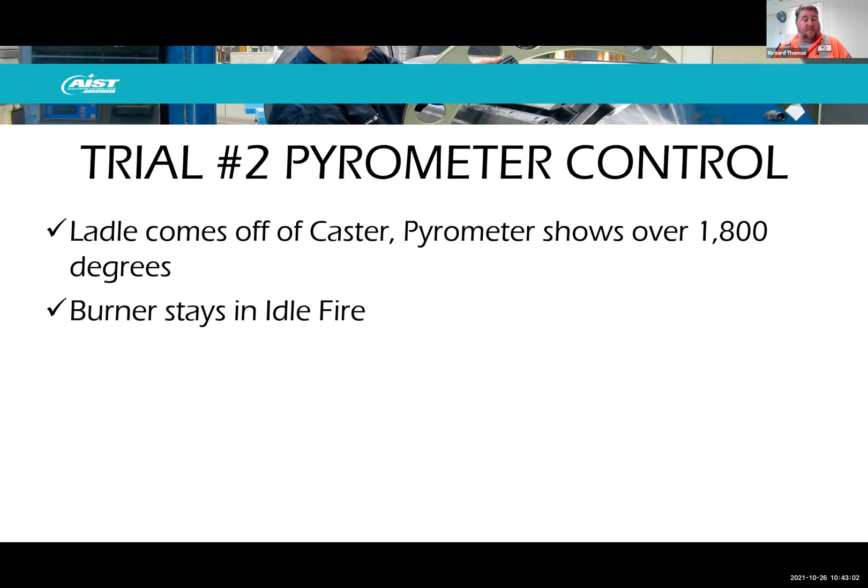So now we put the pyrometer in control again. We're still seeing a good 1800 degrees all the time. So now what happened when the ladle came off the caster, the pyrometer was showing 1800 degrees or over, showing real temperature immediately. So the burner stayed in idle fire. It only ramped up slightly when it needed to maintain that 1800 degrees and just keep bumping it.

So our mechanical cycling on the actuators went down to almost nothing. The sight glass was now staying clean because of the air purge we had going through it, designed to sweep right across the glass and then blow out into the ladle. At this point in time, we have achieved stable control. Everything was running well. Everything looked great.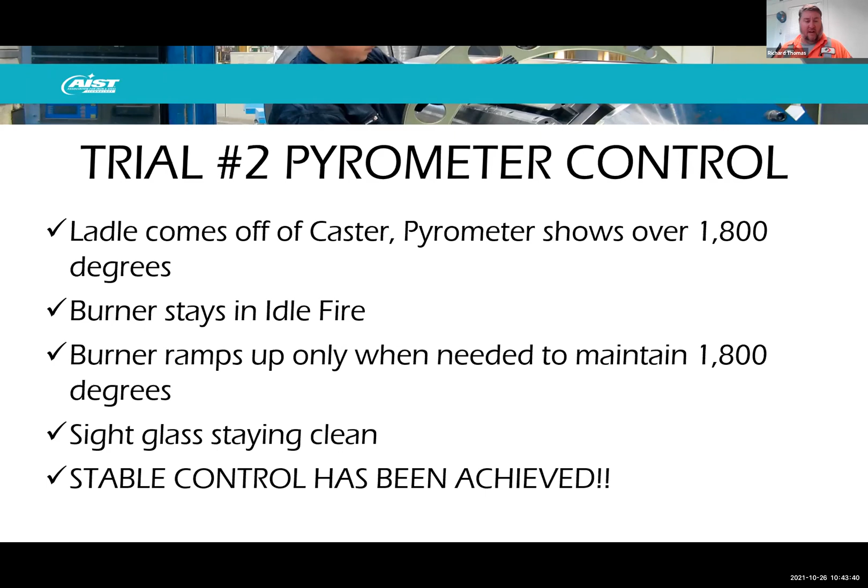And we let it run that way for a couple of months with just one ladle installed. After we decided that everything looked good...

I went back and had to add another pyrometer to the same wall because the NFPA rules require a completely separate over-temp shutoff. So if one fails, the other will shut the burner off so we don't have a runaway. So we put the second pyrometer in.

We pointed it at the 3 o'clock position, directly opposite from the first one. It didn't have any control. It was strictly just to shut down the burner.

I did see a little bit of an issue on that one with a splatter on the sight glass, and that was from cleaning out the nozzles on the bottom of the ladle. We ran both pyrometers there together for several months before deciding to proceed with the final installation.

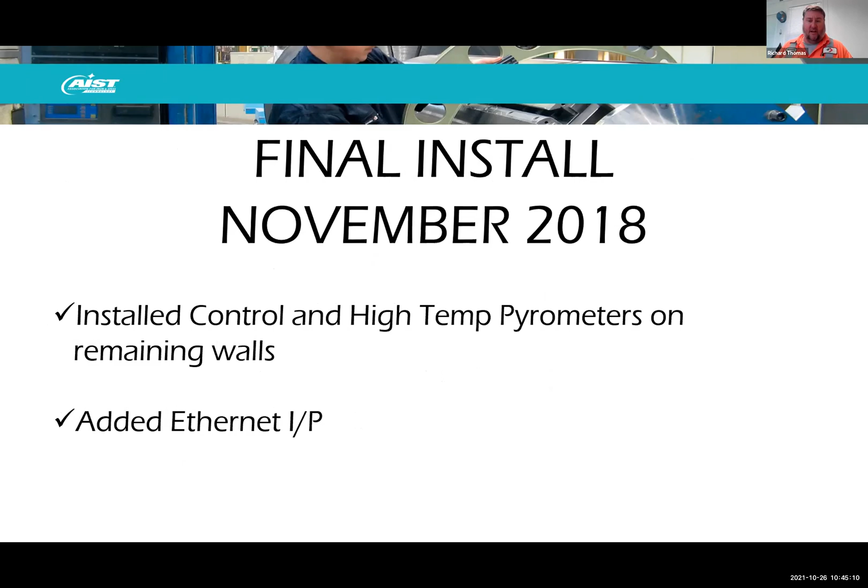On the final installation, which was in November of 2018, we installed the control pyrometer and the high temp pyrometer on the other 4 remaining walls. We also added the Ethernet IP option so we could tie it into our level 2 system and be able to track the temperature of the ladles coming off the wall for future applications.

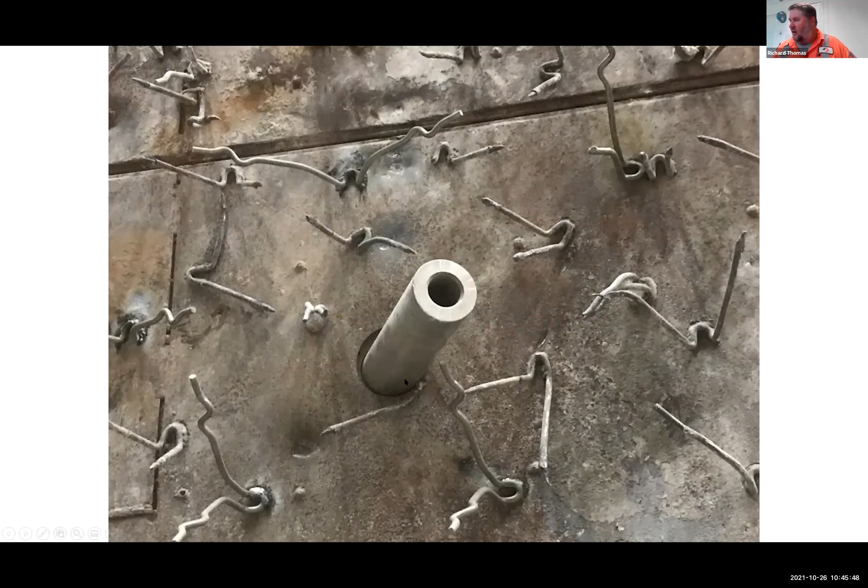Just a close-up with the sight tube coming through. You can see the thick wall on it that guaranteed that sight tube would never warp.

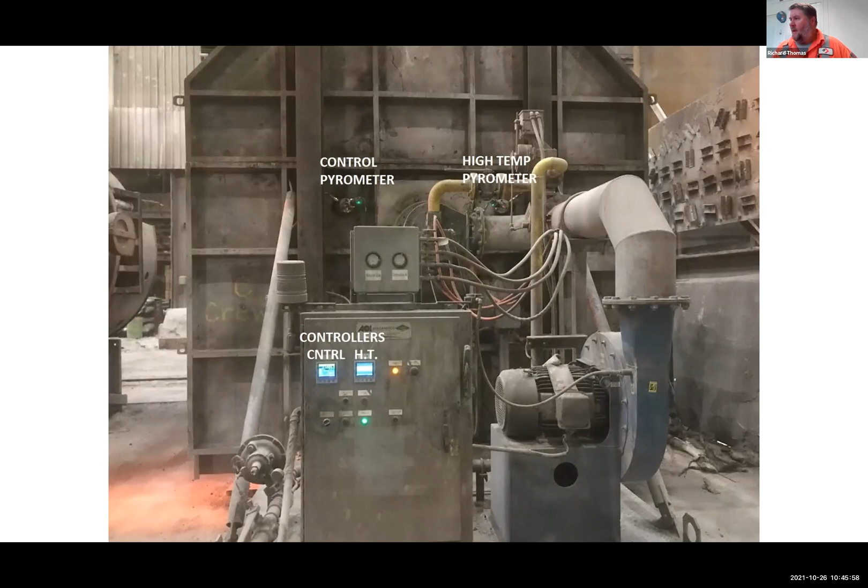Here's the back of the ladle wall, showing your control pyrometer on the left, your high temp pyrometer on the right. On the control panel right there, you see the 2 burner controllers. We did have to change these out too because the original controllers would only accept the thermocouple input, not the 4 to 20 milliamp.

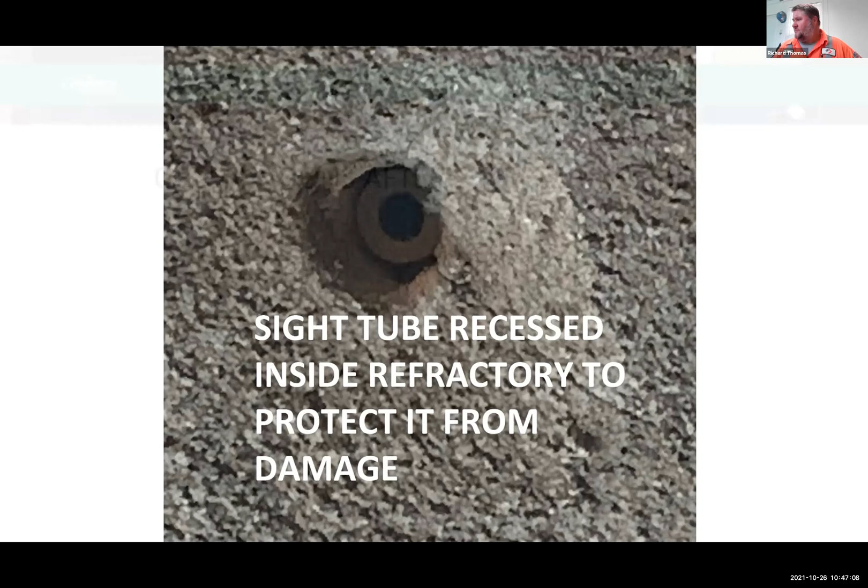After several months, we had several observations here. Number one, we had to go down and clean the sight glass a couple of times. Mostly that was dirt on the outside of the glass, not on the inside now. We had a little bit of slag splatter on the high temp sight glass, again due to cleaning out the nozzle.

Doing this project again, looking back at it, I probably would put the high temp pyrometer looking at the exact same location on the 9 o'clock position as we did the control pyrometer, and that would alleviate that situation.

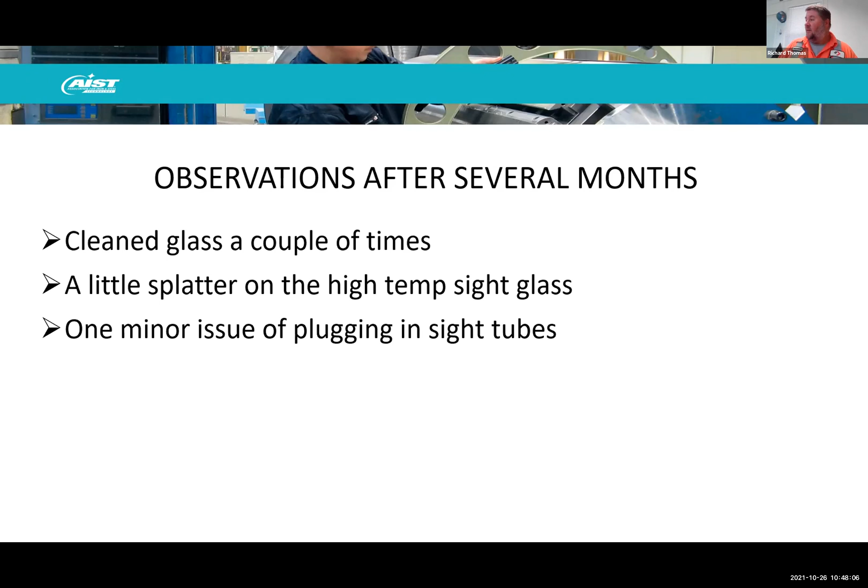I had one minor issue of plugging in the sight tubes. Actually discovered that was refractory sprayed into the tube. It wasn't actually sealing over on its own.

I did have to replace 2 pyrometers since we did the installation. One of them was actually a manufacturing issue, and we had to swap it out under warranty. The other one, we tried running without the sight glass installed, and that was a bad idea. It ended up burning up the pyrometer.

So operations and maintenance both liked the new systems. Maintenance liked it because they didn't have to go work on it all the time. Operations liked it because it was giving them a lot more stable control, and their ladle walls had a much greater uptime.

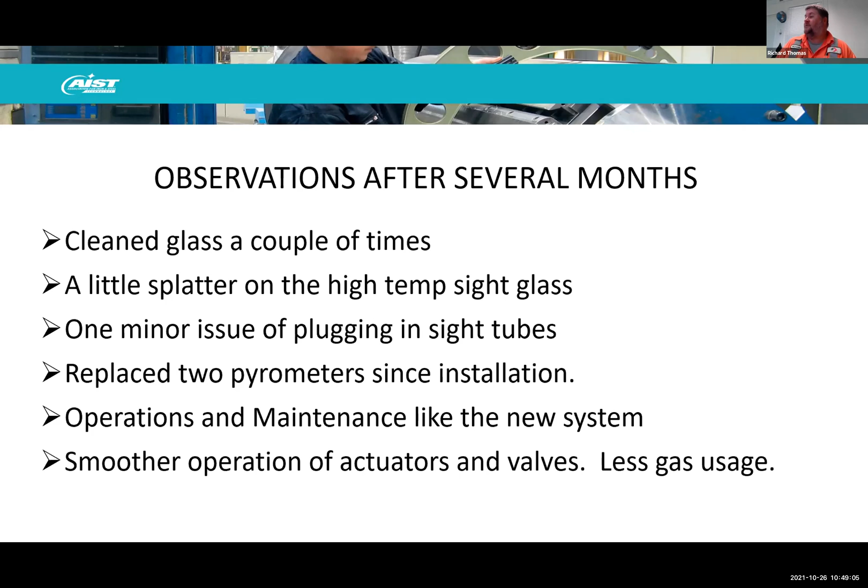We had a lot smoother operation on the actuators and the valves, and we saw a lot less gas usage. So we went from every other day trying to replace thermocouples to virtually zero maintenance, getting called down there once or twice in 6 or 8 months. We had a faster response time because that went from a lagging thermocouple indication to an instant indication, because we were looking at the glow of the brick. We had less wear and tear on the equipment because the actuators are hardly moving now.

We're using a lot less gas. We're saving a lot of money because we're not replacing the equipment all the time, in addition to the gas savings. With the gas savings, that also reduced the company's carbon footprint fairly significantly.

The cons to the project: because of adjusting the emissivity set points inside the pyrometer, we cannot see a temperature lower than 1430 degrees. The only time this really comes into play is during an outage when we let all the ladles get cold. Then we have to put a temporary thermocouple back in place just to get the ladle up to temp so we can bring it up slow.

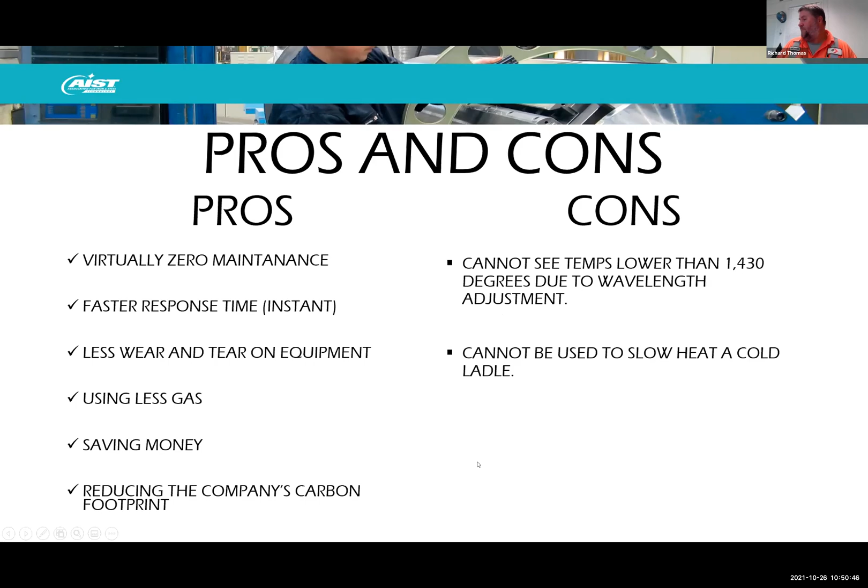So the operations guys, the shift guys, wanted to keep it. They didn't want to let me take it out. But I want to go back and look at the financials of it as well.

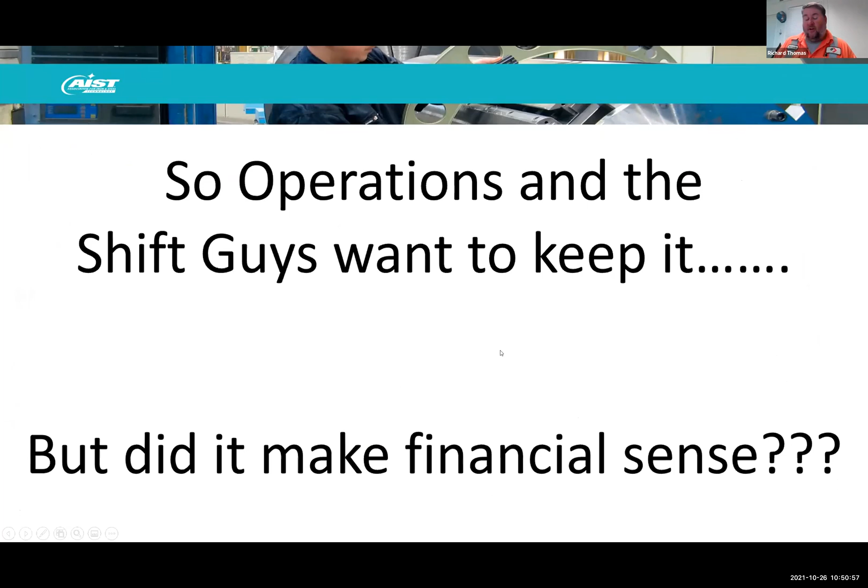So to build this project, over about a 2-year process, we spent $57,000 in electronics, hardware, and cables. The sight tube, R&D, and machining and installation for all 5 walls cost me $21,750. The air purge, the hoses, regulators, all the fittings and everything was another $1,500. So we're just over $80,000 to complete the entire project, R&D and final installation.

Out of that, our natural gas savings—we started tracking for 4 months after we installed the project, and we saw significant savings in our overall natural gas usage. You will notice in June there was actually a negative value thrown in there that kind of messed up my good numbers. But the reason that one was negative is because the ladle wall is counterintuitive to what you would think in gas usage.

When the shop is running really hard, like we were in March, April, and May, we actually use less gas because the ladles don't sit on the wall as long. In June, the shop slowed way down in June of 2019, so we actually had to use more gas because the ladle sat on the wall longer.

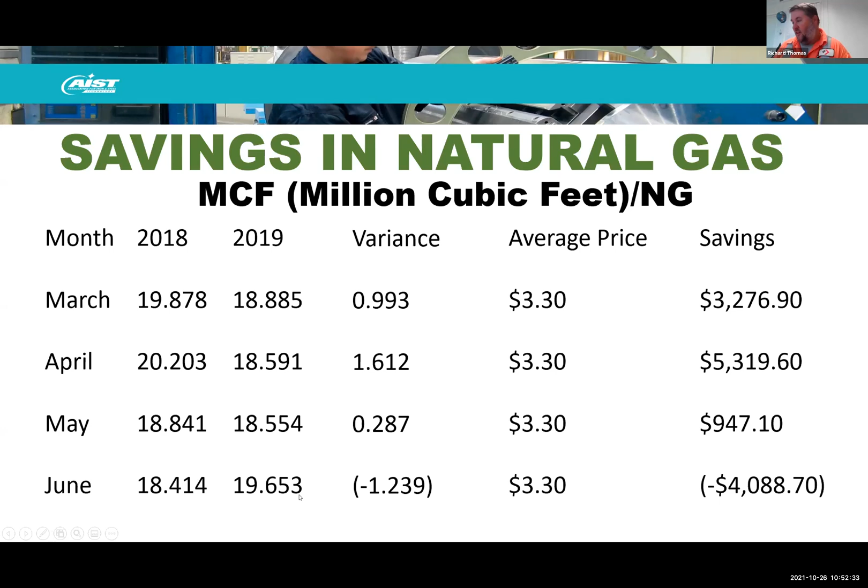Even with that said, we calculated it out on the average per month, and we were saving about 5 million cubic feet per year of natural gas. So projected savings of $65,458 at the current price of gas at the time.

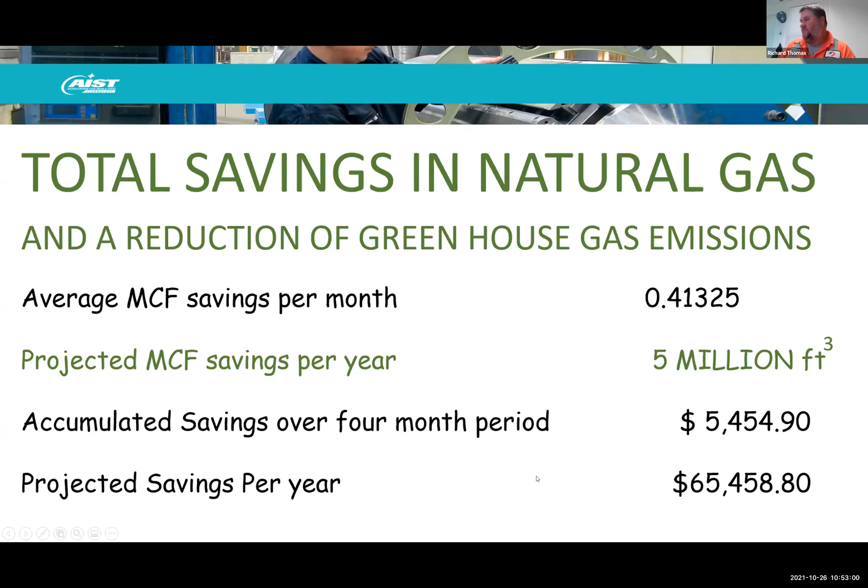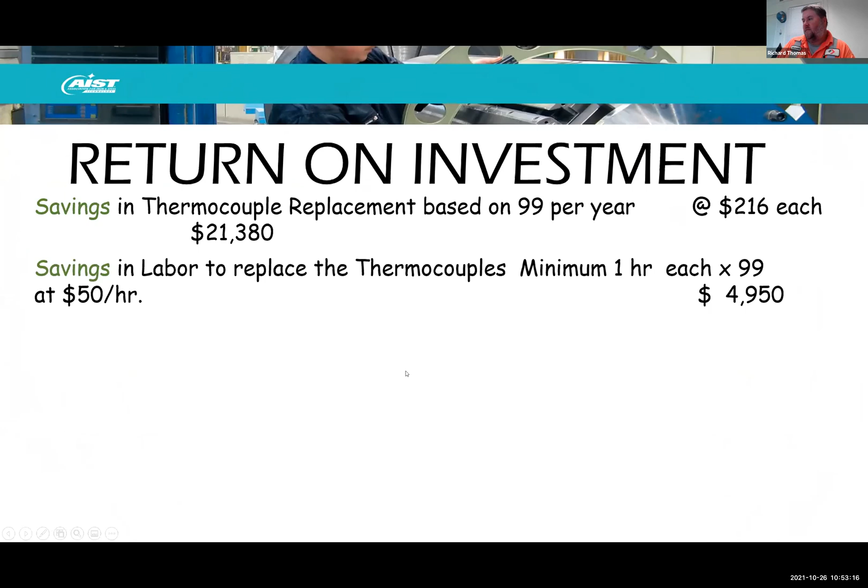So our return on investment: we were saving over $21,000 in thermocouple replacements a year. The labor to replace those thermocouples is almost $5,000 a year. $65,000 for natural gas. Take away the $80,000 that I spent to do the project, the first year we saved $11,500. Every year after that, we're saving at least $91,000, almost $92,000 a year.

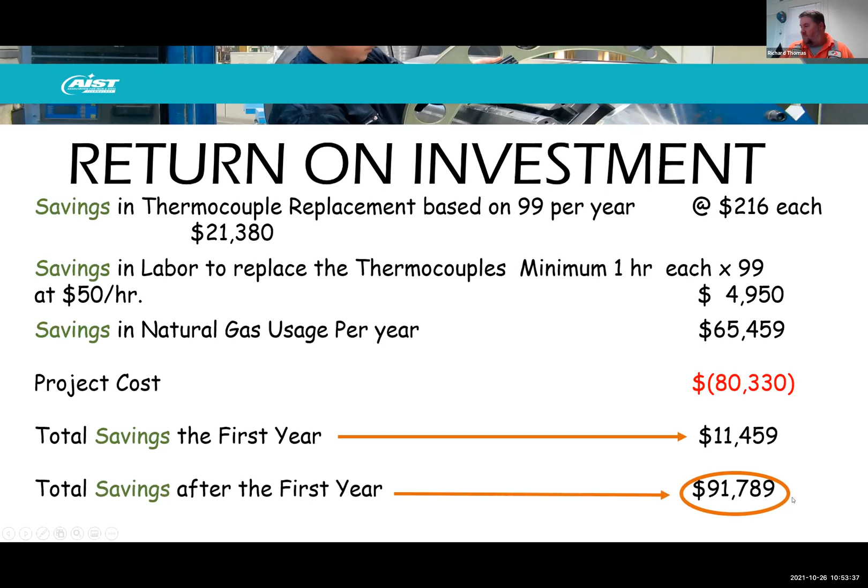The project had an instantaneous return of 239% with a payback period of only 11 months. So the project was a great success. I talked to the guys in Columbus the other day, even though I'm not there. They're still loving it, they're bragging on it. Everything was working great. So that's the end of the presentation that I have.